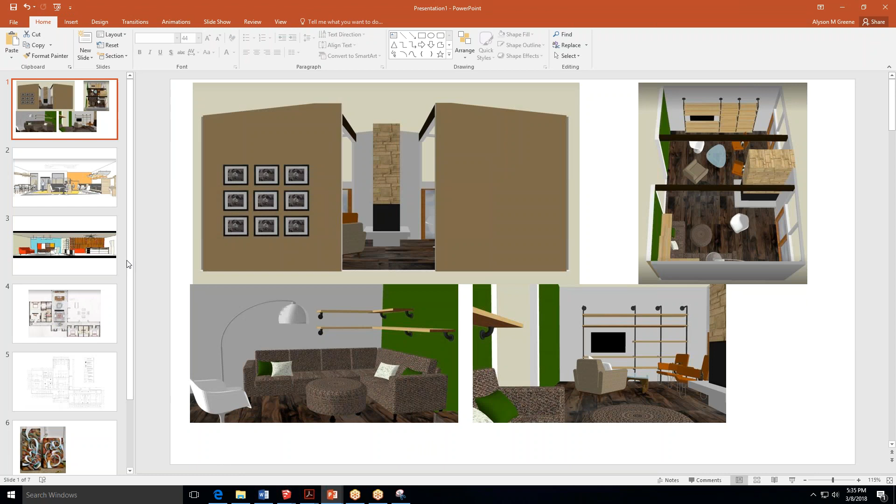I have a full SketchUp model of this crazy one, which I'll show you another time, so I'm not spending too much time doing this tonight, of a really strange project I have where there was a bathtub in the middle. Oh no, well, not a bathtub, a giant pool in the middle of the house, and AstroTurf. Very strange. We bought this huge house and we've completely changed it around.

I've also been you. I've been a student. So these are things that I've done with SketchUp 10 years ago. Still nice, in my opinion. I'd still go to this coffee shop. And this would have been in advance. There used to be not one, but 3 projects. So this was a smaller project in advance on top of my larger project that I did a restaurant for. This was a 1950s hair salon. Both of these files are SketchUp.

So SketchUp can be very clean, editorial, like something like this, or you can change the style and have it be kind of sketchy and conceptual, something like this. Depends on the feel of what you're trying to promote.

The 108 space planning class, that used to be different. So it wasn't the boathouse when I did it. It was create your own entire house, create your own entire 3D model, like physical cut out model that you had to do, and then figure out what the plan was. So this was my final rendered floor plan that I did by hand. And then this was an example of my drafting work, because back then you didn't learn enough CAD to do the CAD to go along with that class. So everything was drafted by hand.

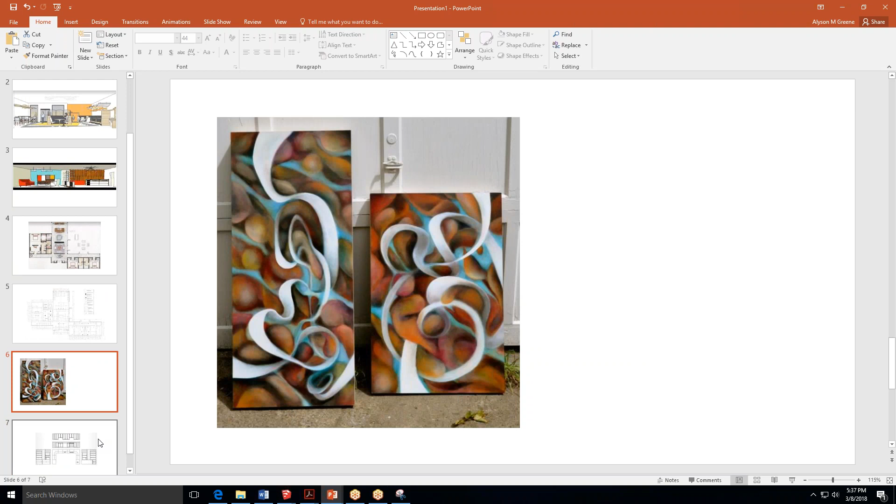Joyous day. And then I'm also an artist. This is art from my first year painting in college to give you an idea of what I used to do. I really enjoy abstract 3-dimensional art. But now I am in the process of doing a lot of commissions for friends and family.

So I have an artist friend and he wanted me to do a Frida. I don't know if you know Frida Kahlo or not. She's a very famous woman and kind of androgynous. You know, is it a woman? Is it a male? So I'm working on this painting. Here's my painting. Here's the original. It has a long way to go. This is like layer 3, a couple of days work. So a little bit longer, but I love to paint.

So I do all these things, the art side of it, the SketchUp side of it, and AutoCAD almost every minute of every day. And I love it. So if you have questions on it and you're not coming to my lab hours, you're really not bothering me. I mostly answer anytime, day or night. If I'm not, it must be something really important. Yesterday I had 6 people hit me up for lab hours that didn't exist, and it ended up being a full day of lab hours, which made sense because Monday didn't work out for me. So if you need me, let me know. You're not bothering me. I like my job. I like helping people, especially with these programs.

So we'll close out of here and let's look at what we're going to do today. Some of you had space planning today. So Professor King was talking about the office that's going to be placed on the site plan. I developed this office. This is exactly why you need SketchUp. SketchUp is so great. It takes something flat that we normally wouldn't be able to use.

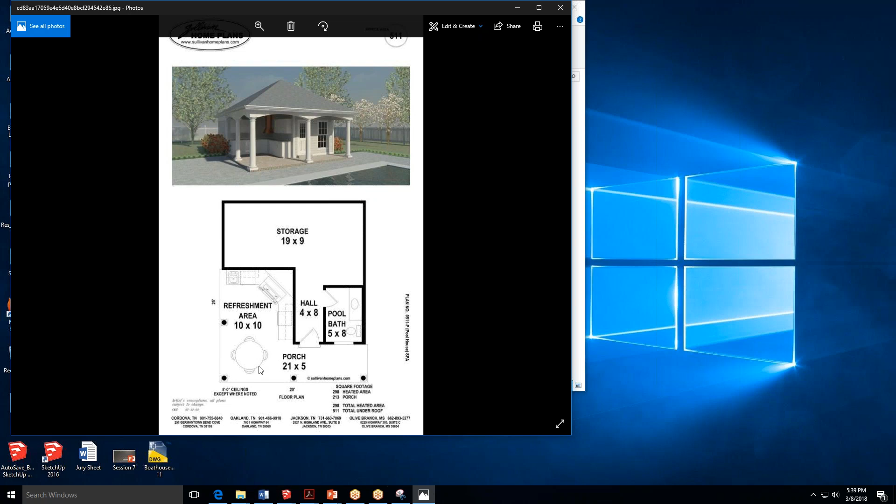I put almost the same dimensions into my AutoCAD file and modified it, and that eventually gave me the SketchUp file you're seeing in front of you today. I just did it from that picture, and I intuited a lot of the trim, what looks nice, what kind of detailing and moldings I'd need. Some of them I drew myself, and some, like the columns, are items I brought in from the 3D Warehouse, which we'll learn about tonight.

It's controlled, and this is real brief, there'll be more detail in a minute. On the right-hand side, it has layers, and we'll see overlapping tools. They look really similar, like this 3-point arc and this move tool. This is a paint bucket, which you're probably familiar with from a different program, and a measuring tape. A magnifying glass. You get used to these things and realize it's not so bad.

Redundancies, repetition. Hopefully this will go my way.

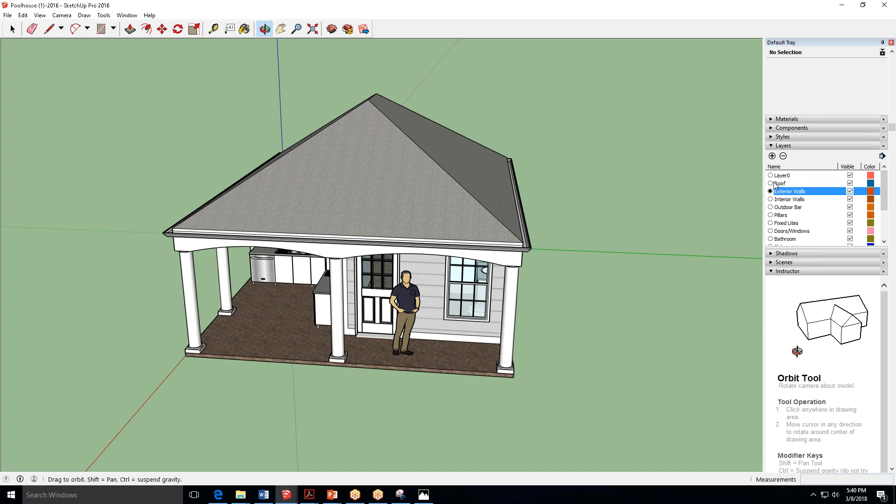Now it's very different software, but there are things that cross between the two. Layers are one of them. So if I put things on really nice layers, like my roof—who knows, this is an old file—I can turn my roof on, turn my roof off. I can rotate up, we're playing dollhouse right now, come over the top, look down into it, and it's really nice. So it's just like CAD, but three-dimensional and polygonal.

Polygonal, P-O-L-Y, like polygonal, that's probably a better way to say it. I'm always shortening it. So we'll explain what that means. A little bit different because they're segmented, disjointed lines, and never actual curves. Well, it looks like a curve, but it's lying to you. Your eyes are misleading you.

So this is the office plan.

Unlike CAD, where I did a slow start, getting in the water, testing your toe, this is a jump-in-and-swim kind of week. It'll be due after break, the 22nd. I'm going to get as much into this video as I can and get us as far forward as I can to help out with the 108 students. So you'll feel it this week, just a little bit, but we've got a break and then another full week. I hope the video is pretty clear.

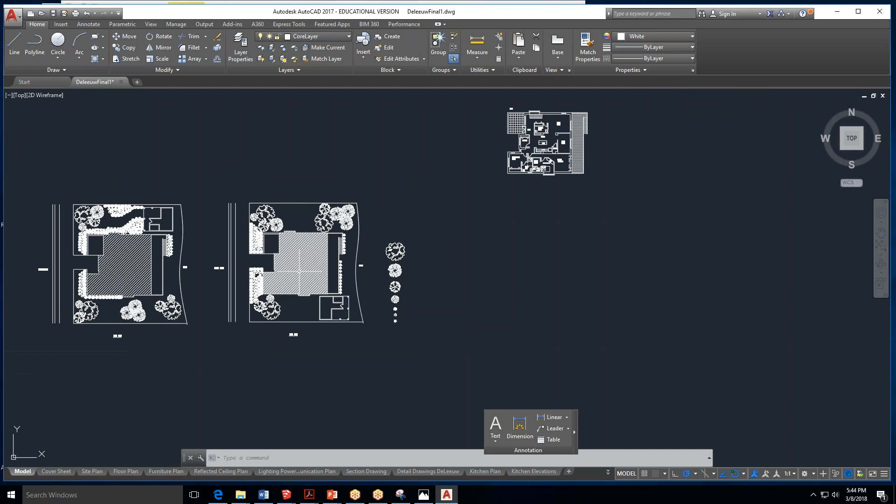But you can put it anywhere you can fit on the plan. Now, she had specific plantings she wanted to go on her plan, so she tried it a couple ways. Here she was like, well, what if I build this nice pathing from the road? It's private with plants, and then I put my guy back here. What if I put it in the other corner? I probably like this one better. What if it's closer to the road?

You could put it up here if it'll fit in here. And the way you'll know if it could fit is you come to the very end, and that's the end of your property, right? So you could give yourself some guidelines like she did to say, this is what I can work in. There might be an easement that she allows extra besides that, sometimes I know she'll say that in her instructions. But if we're staying in the perfect boundary, somewhere in here, we got to plop this guy down.

Now for my students, don't care, wherever you want it, that's fine. You just draw it. That'd be wonderful. For students in her class, wherever makes sense to go along with your actual work.

You might want to put this guy on his own layer, right? So we could go up to layer properties. I can only imagine what Liz's layers will look like. And then we get a new layer, and we can come in here and say, what do we want to call him? Outdoor office, you know, whatever makes sense to you. It's just a layer. It's a way to manage things.

So I have outdoor office, and while I'm drawing it, I want to make sure that's my active layer, so I can drop down the layer menu and go into my outdoor office. They're alphabetical, here's my O. And if I was drawing, then I'd start drawing until I complete this. Now I didn't draw it, so I could also select everything and at the end go in and plop it onto that layer, hit escape, and then check it. Yep, everything's on outdoor office now.

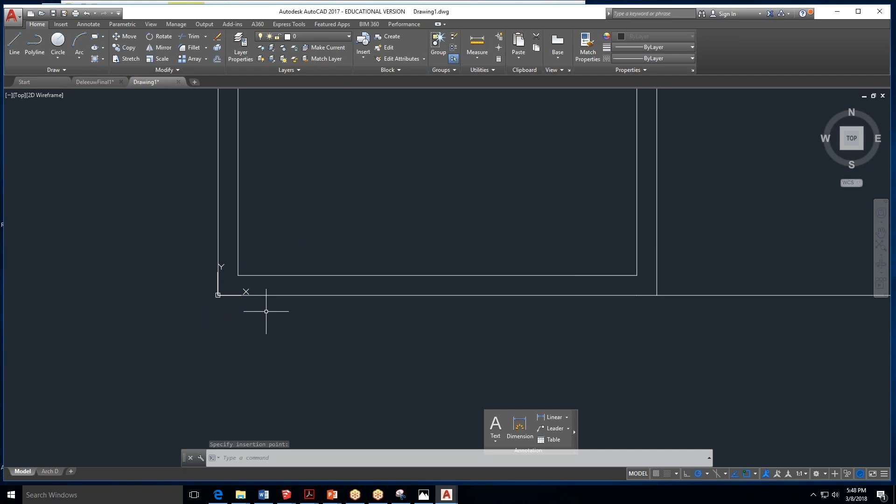We got a nice clean point of access right here. We can do Control V to paste it in, or we could have clipboarded it in with paste up here. And I'm not going to make you do the comma 0 0 whatever and put it there. Just kind of locate it here, because SketchUp does well with finding that same 0 point. So the closer we get it to it, the easier it'll be to locate it on SketchUp's screen. So ish, not perfection. If you want to, you can review that, that's like in our second week of CAD video, how to get stuff at the origin.

So I have him placed. Now I'm going to save him, and he's in my architectural imperial. That's really important because that's feet and inches. I'm going to save him as something meaningful to me, so I could do outdoor office, because that's what I did in the other one.

If you have a special author you're designing this for, you could use that person's name. I don't really care, just that it makes sense when you go to import it. So wherever you want, for me it's under week 8 on my desktop, and I can save it. Now I have this file, isolated from the bigger file, and it's really, really clean.

Let's look at SketchUp. I have a bunch of stuff I want to keep open, and for my sake I'm just going to keep it open so we can review some of it as we go on. But this is a trick.

I already have SketchUp open in 3 places. If you tried to open SketchUp once and it popped open and then you started working, and then you went to open within SketchUp, it'll ask if you want to save the current file, and then it'll close out of it. So in order to prevent that and have multiple SketchUps open, if you have a mouse with a center click, you click on this symbol down here and it will open a whole nother SketchUp, as opposed to opening within itself and closing within itself.

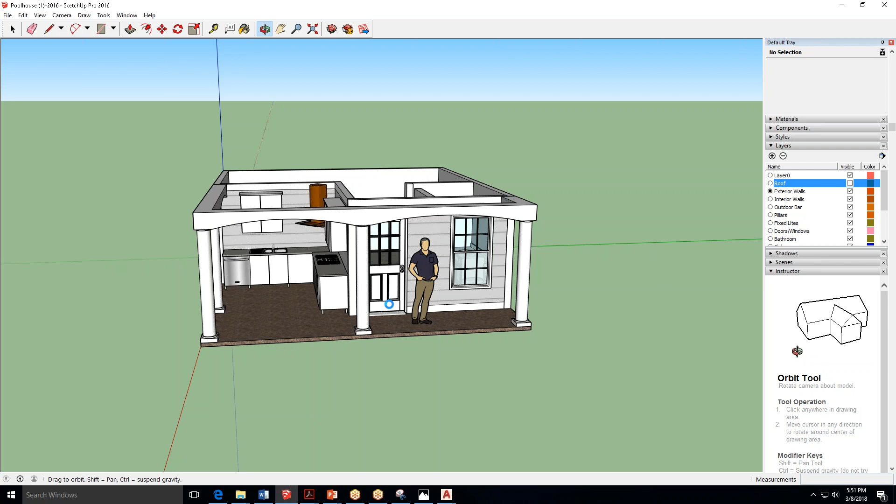All right, so that's if I want multiple SketchUps open. I could have one open, and then I could click on it with my center scroll. If I just have SketchUp somewhere here, so here's my 2016 on my desktop, and I double click it, and then I say start using SketchUp, it'll throw me into whatever my last template was, or choose template.

It might force you to come in here to this template and you're like, oh my gosh, look at all these things. So there's simple template feet and inches, simple template meters, architectural design feet and inches. What is the difference between architectural design feet and inches and simple template feet and inches? Well, this is really silly and you're not going to believe me, but the difference is that architects don't like the blue and the green. They like the cleanliness of the gray and the whitish gray background. So they created this template which doesn't mock the reality of the outside, just to be fancy. And that's the one I like to use as well, because I'm not a huge fan of the sun and the sky, but we can do either one of those, simple template feet and inches or architectural design.

I'm going to use architectural design and start using my SketchUp. So that throws me into here, which is going to bring me to kind of our notes and where we're going to be with our homework tonight.

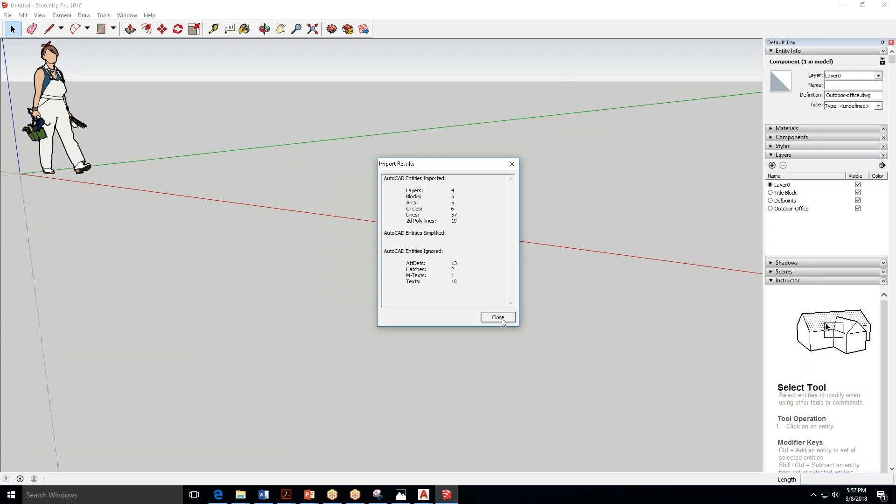Within there, I had saved the file as Outdoor Office. I'm going to left click on it to make it active, and then I'm going to click Import in the bottom right-hand corner. It's thinking through all these things. Look at how many things it had to think about. Layers, blocks, arcs, circles, lines, polylines. It thought about if you hatched things, if you had text. So you can see why a bigger file would drive it absolutely insane. You can click close. It's not going to hurt anything. It's going to continue on its way.

Notice it forces one of the corners to the origin here. I know it's the origin axis because there's my axis lines, right? I have the vertices of all of the axis points meeting with each other, and we'll look at what those things are in a minute. There's an orbit tool. It looks very similar to AutoCAD's, up here in our toolbar. And if I rotate around, so I'm left clicking and moving my mouse across the table as I'm left clicking, holding down, not picking up. So not click once, but click and hold and pull my mouse around in order to orbit.

I can also zoom in and out with my center scroll, just like in AutoCAD. There's views that are like AutoCAD, so the top view in AutoCAD is what we're defaulted to. When I'm in AutoCAD, this is my top view. I am bird's eye looking down. When I'm in SketchUp, if I go to View, let's go to Camera, Standard Views, Top. It gives me the same identical view as what I'm seeing in AutoCAD.

Now, I can't promise you. If we look at this, it's really nice, so I hope that it comes in like this. I've seen it happen the other way though, that it comes in, my origin was here, and it's not oriented how it's supposed to be. I'm not going to promise it. It might have to be rotated, which we can cover in a little while, but it looks very similar. We see these snapping points. Now we have a plan we can start to build some three-dimensionality off of.

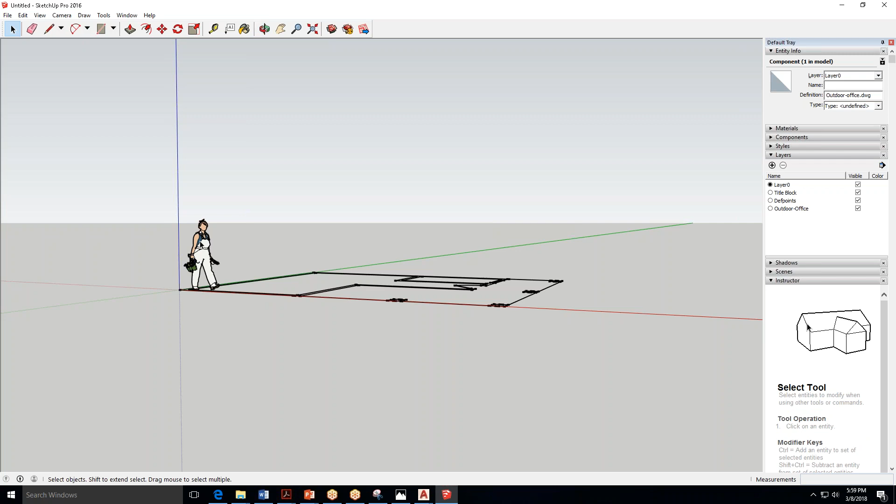If I rotate back up, it's no longer in top view using my orbit tool. Now I'm going to use Rosie the Riveter. She's going to get out of the way over here. So I could select her by clicking on her. This is our select tool. Select entities, modify tools, or other commands. Similar to CAD, we want to see that little mouse pointer. I clicked on her. She's blue and active, like things in CAD when they are active.

And now I'm going to just move her out of the way. So if I click on Move, and then click on her, I can move her out of the way. Now I could put her in the sky. I could put her on the ground. Notice there's a little red line. It's very similar to that ortho tracking that we have going on in CAD. So this is just moving her out perfectly along that red axis to the right side. So there are snapping lines that are created by these dashed lines that will appear when we want to move something more strategically. Now Rosie's way off over there, okay?

All right, I'm gonna look at my chat. Okay, we're still good.

So we have our import. Let's go back to our homework. We've imported it, and my steps say that I am going to draw all corners and diagonals before anything else. I'm actually approaching this differently this year, so if Heather's here, it's going to be really different, Heather. I mean, the tools work the same way, but I'm not going to have them draw abutted corners. I'm going to do mitered corners so that the wall's exterior works a little bit better. We're going to do those diagonal lines all at once to start creating faces.

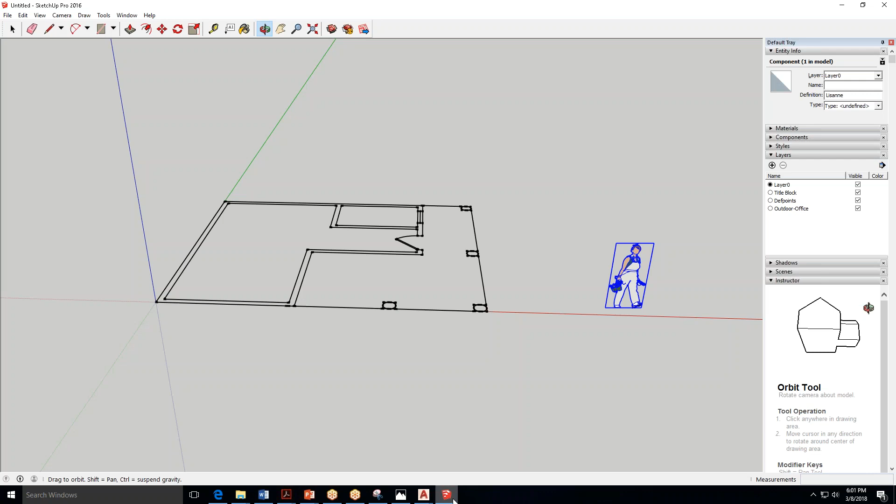Keep with me. So I'm going to go back to camera, standard views, top. And I need to add faces because right now I just have lines. Notice how it's like black lines on a gray sheet of paper. I'm going to show you if I grab the rectangle tool, hover, I have shapes under the drop down menu. There's rectangles, rotated rectangles, circle, polygon. Most of the time we use rectangles and circles. So this is part of your homework earlier, like the easier shapes. Just grab the rectangle tool and draw a rectangle.

Notice the difference in the gray. So at the center here, when I left click and I went back and grabbed my select tool to click on here, I'm selecting the face of this object. When SketchUp has 3 or more lines, it creates a face.

So if I was just drawing lines, which you do with your pencil tool for lines, hover over it in the upper left-hand corner, I left clicked on it, and then I left click to start drawing lines, so line 1, and then I want to click on an endpoint, line 2, and I want to click in to finish. When I finished with 3 lines, it can't be 2. You need at least 3 lines to create a face. There's a lot of mathematical geometry going on here.

So I create my face. Then it puts the face in the middle. It's almost like adding glass over a frame. We made our frame. It's perfectly connected. And now I can put my sheet of glass. It just appears in the middle, creating a face. My faces are separate from my lines in reality. Here's a line, a line, a line, and here's a face. Here's a line, and here's a face.

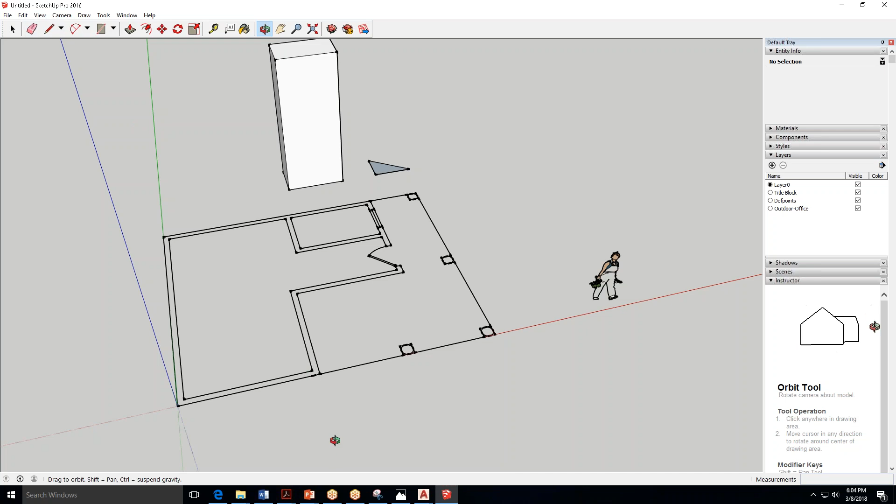So I want to create all the walls of my final office building. So I'm going to go back up to camera, standard views, top. There's a lot of little terms I've got to get in here, terminology on top of the homework. So how can I create the faces best and put them on good layers and group them so I can turn them on and off?

Most importantly, because we're moving towards using this to create really good elevations, both interior and exterior, is the ability that in 3 dimensions, if this was all one piece in here, and it was all in one layer, just like in layers in AutoCAD, then if I wanted the bathroom elevation in here and I went to turn it off, the back wall would turn off with the front wall. We don't want that. We want to have the ability to turn off just this piece or just this wall and looking at it from different sides. So it's a lot of layer management. The more layer management, the better your outcome will be.

I'm going to grab my drawing tool, my line tool in the upper left-hand corner, and I'm going to miter some edges in here. So I'm going to add a line here, and then I'm going to hit escape. I'm going to add a line here. I'm going to add a line down here. It's trying to keep, I'm scrolling in. It's just trying to keep up with me. And a line here.

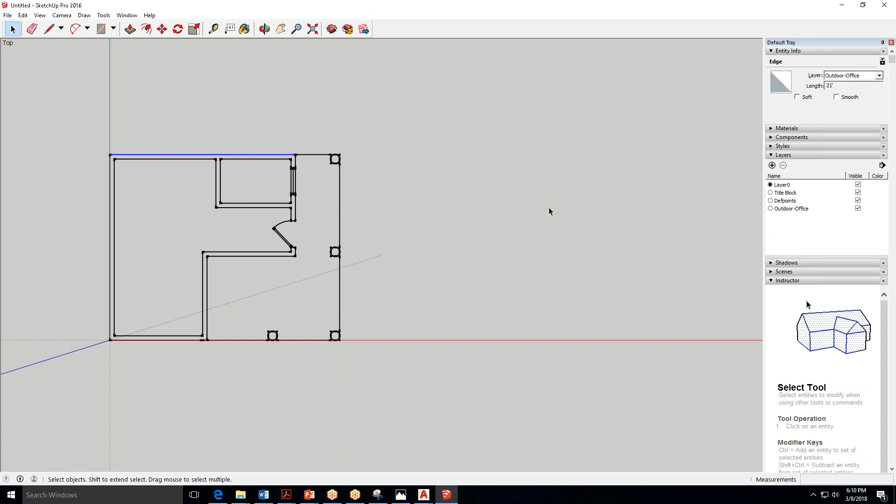Okay, so if you had clicked on it and the whole thing was blue like this, the step that you need to do is simply right click and click explode, like that. And once you explode it, then it's lines, and we're all going to be in the same place. So if it comes in as lines, that's great, you're ready to go. If it comes in as a big blue block when you click on it, you need to right click on it, and the word explode will be there. Click that, and it'll turn it into lines, just like in AutoCAD. So it's kind of good we're covering these little weird things that can happen.

So now I'm ready to draw those lines, and this should be more efficient. I add my little miter corner. Now, because it created the whole face, you're not done. We still need to have multiples eventually. So I want to come in here and draw my little corner. I want to come in here and separate off the interior walls, and these interior walls. I want to do the rest of my corners.

And I'm simply clicking twice. So I have my line tool, I'll click there, click to the second endpoint. Just like in AutoCAD, we have snaps. So you saw it's like, okay, endpoint to endpoint. You want it to say endpoint to know that it is in fact connecting and you're not drawing short of the line, which won't create the right amount of faces for us. So once I have all of those corners mitered off and the interior walls kind of sequestered, let's look and see what our homework says we want to do.

Delete extraneous window and door lines, close off, create guides for window and door. So we're going to end up bringing in models of doors and windows, so our lines no longer matter to us. What matters is the opening. So these lines don't matter. Notice I can just left click, hold down and pull to the right and then release, and that will select this door here. If I do it the other way, it's only selecting certain things that are inside the box.

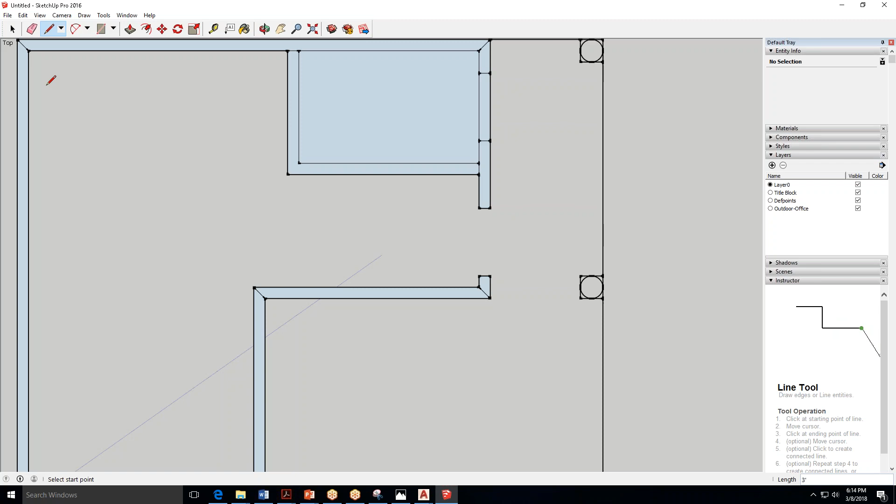I need another line yet, and it might do the same thing. And you're just going to get used to SketchUp being like, I want to do this for you. And you're like, no, you're not Google. Don't complete things for me without me asking you to. So keep going. Oh, I did it again.

Come on, SketchUp. So then you click in here, click delete, and click in this big piece and click delete with your keyboard. So I'm hitting delete on my keyboard. And then I'm going to click my line tool again and finish up the other side of this opening that I'm closing. Now we have to do our selection tool. Click once for the face, delete.

Don't double click. Now, some of you are the crazy clickers. You cannot be that way in this class anymore, because in SketchUp, a double click means something different than a triple click, means something different than a single click. They all do really weird things. So when it's single click, it really matters this time.

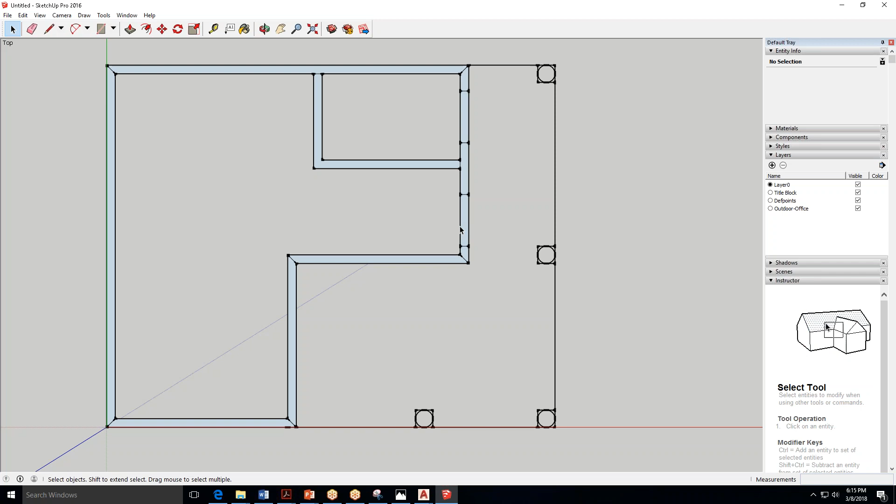I'm going to single click in here and click delete as well until I have just the core walls that are showing as faces. So my homework said, do all of that work, extraneous lines gone, and then draw some guidelines based off of these openings to rough in my doors. So we're starting to get three-dimensional at this point. So I need to know some heights, and you're just going to trust me.

I'm rotating up with my orbit tool. I'm holding the left click and pulling up like this. If I hold it and pull it down, it goes down. Some of these things you just have to experience for yourself a little bit, but I can clearly see these snap points for my windows and doors.

Let's look at our homework. So my window is 1'6" above finished floor for the sill height, and my door is 6'10" tall to the topmost part of the door. I think I'm missing one dimension there, but we'll be okay for now. So this is my door opening. I could know that from my PDF.

Now it's oriented the other way, so let's view and rotate the view clockwise until it's matching up like this. So here's my door opening, and that's what needs to be 6'10". So I'm going to grab my line tool, left click on the first point for the corner of this door on the exterior end point, and now I'm going up.

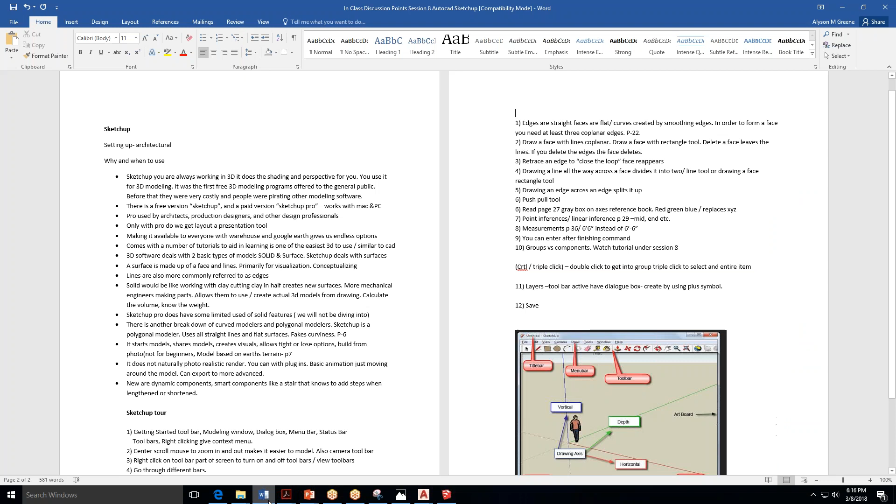Okay, so before I finish going up, I want to look at my notes page, which I might refer back to, and I have no problem with posting this later for you. But right here's my notes page, and it's showing that blue line, and I bet this is kind of hard to see for some people on the screen, the size of a small book. So if I zoom in a little bit and we look at this picture, the blue line is our vertical.

Okay, so the line's going straight up and down, and the red line is my horizontal, and the green line is my depth. This is really important to remember. So blue vertical, green depth, red horizontal. But when it's blue, it means it's perfectly straight. So that's good. It helps me understand some things.

And then here we can see toolbar. That's the most important term I've used so far. Where our tools are at is our toolbar. Title bar, like in CAD, it tells me what my file name is. Status bar, it's basically like our command line. It's telling you like move this to the left or what's the next thing you want to do. And this is telling me measurements in the lower right hand corner.

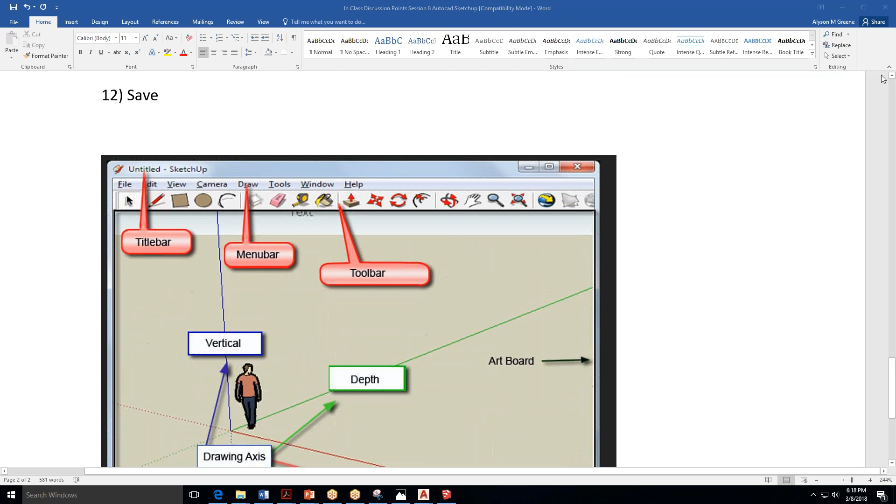I feel like I heard someone kind of speak, but I'm going to keep going.

So vertical line, great. That was a good signifier that I was doing the right thing. Vertical up 6'10". So when we type measurements in SketchUp, they show up over here in the VCB box where the length is. Unlike CAD, we don't have to put a dash between anything, and actually newer CAD doesn't require it either. So if I'm doing 6'8", I can type 6'8".

Look in the lower right-hand corner. See how I typed it? Yes. I think you said 6'10" originally. Oh, 10. Thanks, Heather. It didn't finish it yet, so I'll pull it up. 6'10". Heather's right. I changed it this year because the molding makes it 6'10", and it was a weird thing last year. All right, so see it in the lower right-hand corner, 6'10".

Now I can hit enter to finish the line. I think something went weird because I was kind of tracking off, so let's try it. Measuring in SketchUp is even more important than CAD because it does get sticky sometimes. I want to see this blue line, and I want it to be 6'10".

Enter. All right, let's measure it. Maybe it's right, but it looks like it's falling short. Oh, it's good, all right, it just looks so teeny tiny.

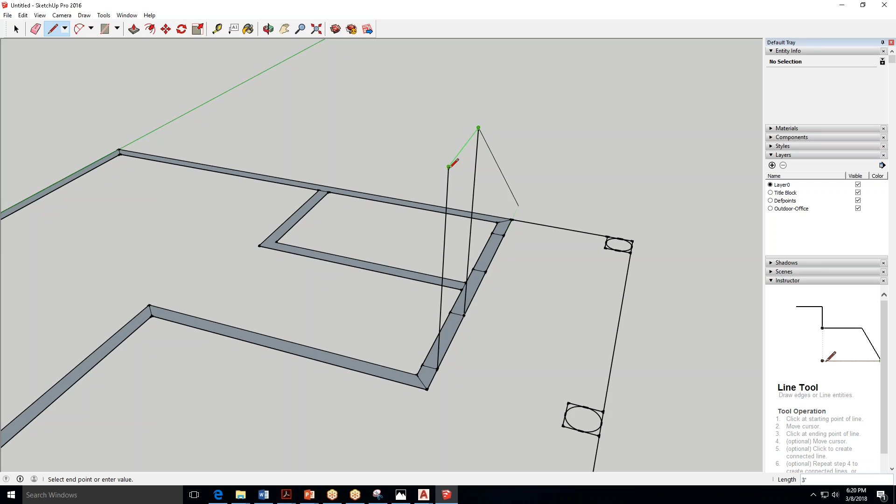Then I want to do the same thing from the other exterior endpoint. Snap to the blue, it'll turn blue. See how it's blue? I'm going to type 6 foot mark, 10, right next to it, and then the inches mark. Enter to finish my line. Then I think I can even connect them and I'll be fine. We'll see what happens. If not, I'll just delete that line out.

And now I have where my door is going to be. My window, I at least know it's 1'6" to the sill height above finished floor, so I'll confirm that here. My window is 1'6" above finished floor. That's this point and this point need to be up 1'6".

It needs to be snapped to blue. So 1 foot 6 inches - I'm typing on my keyboard, you see it in the lower right. Enter. And then I'm going to hit escape and grab that tool again.

I'm going to do the same thing on the other side. 1 foot, 6 inches. Enter. All right, so that gives me some guidelines.

Now that I have those guidelines, I'm going to go through - and it's not going to make sense why until I do it - but I want to delete these out, because what's happening is SketchUp recognizes these as individual pieces. So if I go to push-pull them now and push this up 8 foot, it'll be a bunch of different segmented pieces instead of a whole wall I cut openings out of.

So what I'm going to do is delete out these lines interior to the wall. I clicked it and then hit delete on my keyboard, clicked it with my selection tool, hit delete, all the straight ones, not the corners in this case. And I have guides as to where my doors and windows are going to go.

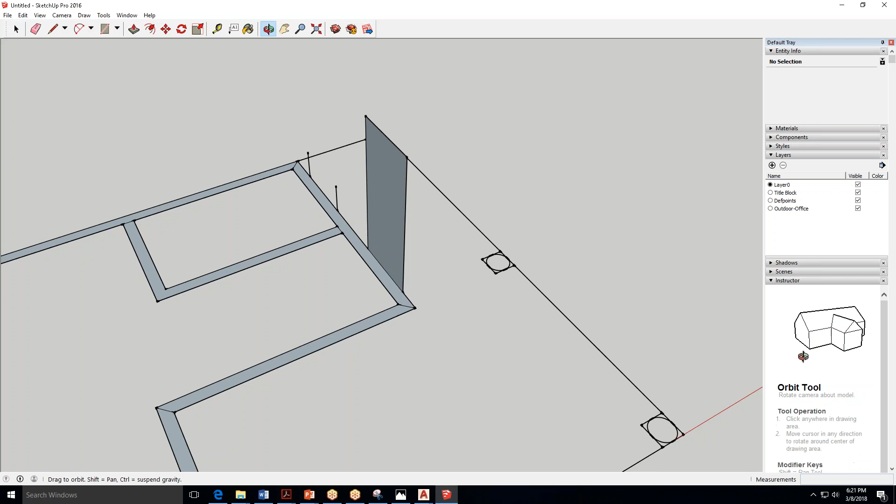So I can now start to organize things, because those were my only openings I needed some type of guidelines for. And when I push this up, it's going to be a full wall - you can see the full face now is highlighted instead of those segmented pieces.

So if I go back out to here, I've deleted the extra lines, created the guides, and now I need to create some layers to help manage my whole drawing. So I need north, south, east, west walls. That's easy enough - you want to make sure that you have your default tray open.

See this guy over here? He's called your default tray. If he's ever gone, you can come up here and open him from Window, Default Tray, and turn him back on.

But he should be here when you open it up. Under the default tray, we have materials, which if you click on any of these little drop down arrows, they'll make them bigger and there's more stuff you can do. And styles, but we want layers.

Layers might have been closed - this might be how it is when you come in. You just click layers. I would recommend not having too many things open in the first couple weeks until we know what they are, so you're not visually overly stimulated. So we have layers, and we need to create north, south, east, west wall.

I hit the plus button to add a layer. Notice when I hover over it before I left click, it says add a layer. I left click and I can do north wall. Then I can click plus again, south wall, plus again, east wall, west wall. All right, there's all my walls.

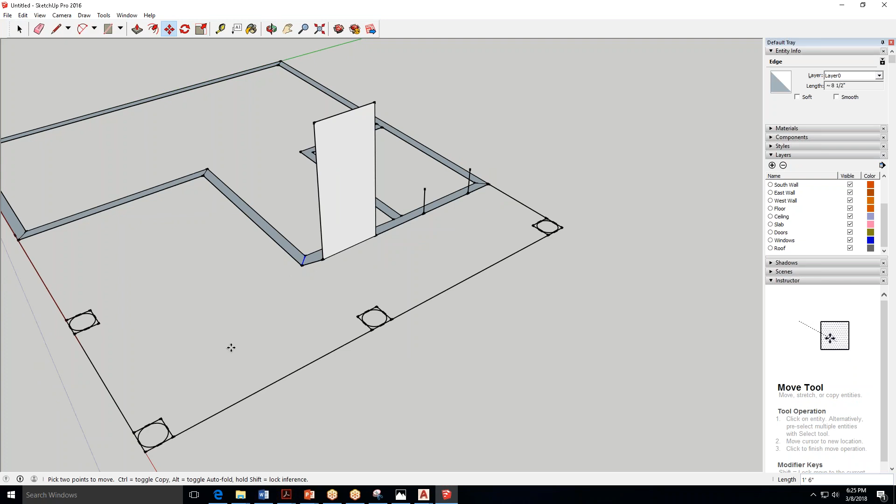So in order to create a group, right now we just have a bunch of stuff and it's all really sticky and not good. So you don't believe me yet. But if I tried to move this line, for instance, and it's not in a group, look what happens. Ugly things happen to it. Oh my gosh, SketchUp, you are one crazy beast, and it really is mind-boggling, to be honest with you.

So you don't want to move things by their lines. You want to move things by nice contained groups that are very strategic. What I need to do is have this whole wall be in a group, this one, this one, this one, this one, because I want to turn them on and off separately, and I don't want them to move like creepy abstract shapes. So if I'm going to do that, I need to select things.

Now we can select by clicking things. If I hold Control, see the little plus next to my cursor? This cursor in here, the little plus. I could do them all individually like that and click, and I'm holding Control. I'm not releasing Control, so I'm holding Control and continuing to click all the little pieces associated with that first wall. The corner pieces do not matter in this situation, okay? Just all the lines and the faces, not the corners. They do not matter. So I could select everything individually using Control.

And the great thing about SketchUp is you can move just like AutoCAD, but I don't think people believe me sometimes. So like I have all this selected, and then if I select on my orbit tool, it's still all selected. I can kind of look around and see if I got anything as long as I don't click off of those things, click on the screen before grabbing my orbit tool. So I've got everything from my first group.

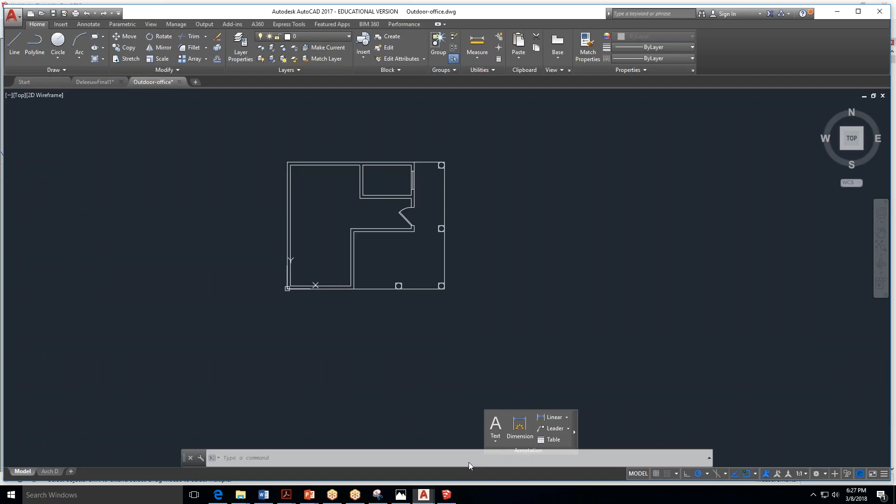Now I don't care how you're organizing your wall. For me, I'm going to call this north wall today just as a jumping off point so you understand, like this is north, this would be a north, this would be an east, this would be a west, according to how I'm doing it. But if you're in your AutoCAD, you really want it to be based off of our model, right? So if this was it and we have this being north, so this might be north if this is how you end up placing it.

So it's up to you. But what I care about is the walls make sense, your layers make sense. So I wouldn't say this is east and this is west. There wouldn't be a vertical east and west. It would be opposite ends, kind of a thing. So this is my north wall.

And I'm going to keep going around and making these individual groups. But this one right now says in the right-hand corner, it's on layer 0. Well, that's not useful. So I'm going to, just like in CAD, drop down next to layer with the wall selected and find north wall. And then I'm going to click off. Now, if I click on it again, just to check, it's on north wall. Great. All right, I'm going to click off so nothing's active, just on the gray space.

And then I'm going to go to this next wall, which I said is going to be, so if this is north, south, this is my east wall for me. Doesn't make a lot of sense with how it's oriented, but it just is for me. So I can also select things like this, right to left, and it grabbed everything I need. Big long line, face. I don't care about the corners because they're just joints. So I'm going to right click on that and click make group. And once it's a group, it's active, I can come up here and I'm going to put that on east.

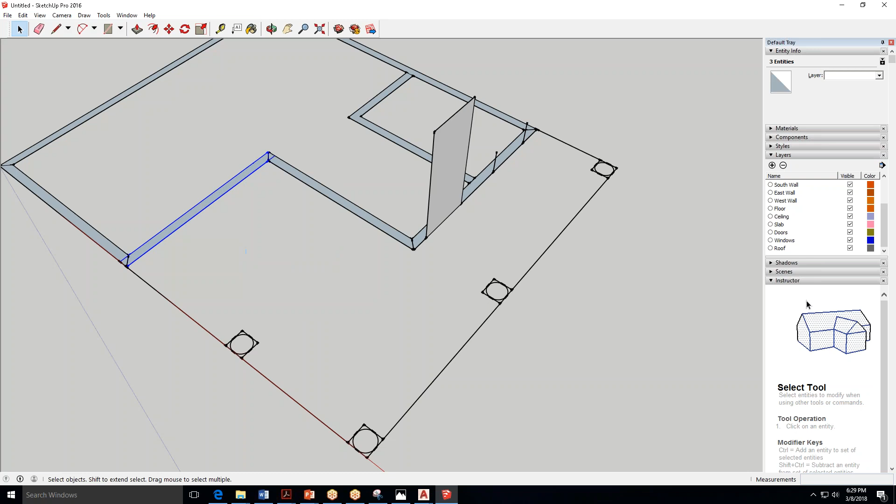I'm going to come in here, right click and select those three things, line, face, and make that a group by right clicking. I'll put that on layer north because it's still technically part of this north face on this side of the building. I'll do the same thing continuing on. I'll escape out so that's not active. So this is on north, this is on east, this is on north.

You can check yourself, it's in the right-hand corner. I'll hit escape so nothing is active, or click off into the gray space, not on a line, and continue to select around and repeat that process. I might not keep talking at you for a while, but let's right-click these things first.

Right-click, make a group, layer east wall. Notice they're alphabetical as well. Then once it's a group, south wall. Right click, make a group, west wall. Now these guys, they don't have anything, so maybe there's an extra wall that we need to make.

Maybe we just make a layer not mentioned in your homework. I'll add interior walls, since they're kind of insignificant for us as we're not going to complete the interior this semester. That way I can collect what's remaining, make it a group, and put it on interior walls.

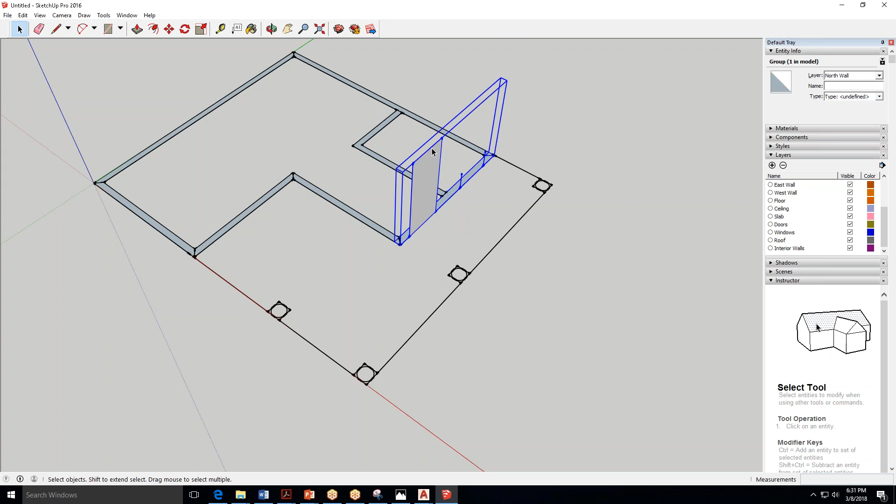Now I clicked out here in this gray space and I'm outside now. If I click on my items so it's selected and then double click, 1, 2, I'm now in here and I can actively change it. I'm going to zoom in a little bit and push pull my faces up to 8 foot.

I select my face, and I think I'll have to click it anyway. So if I click push pull and then click on the face that I want to push pull and start pulling up, I'm going to see the distance changing in the lower right hand corner, and I want to type 8 foot, enter.

Ah, I did undo. That brings it up, and I'm glad these things are happening so you understand why, okay? It said, sorry, your distance is not going to go past 6'10". This horizontal line I created earlier is inhibiting it from going any higher because it's snapping to it and won't let me go past it.

So I'll just have to keep my side guides, which are plenty fine, and we'll try it again. If I come into push pull, left click on the face, pull up, I don't want to snap to anything, okay? So we could even zoom out, and you can pull up higher than you're going and type 8 foot, enter.

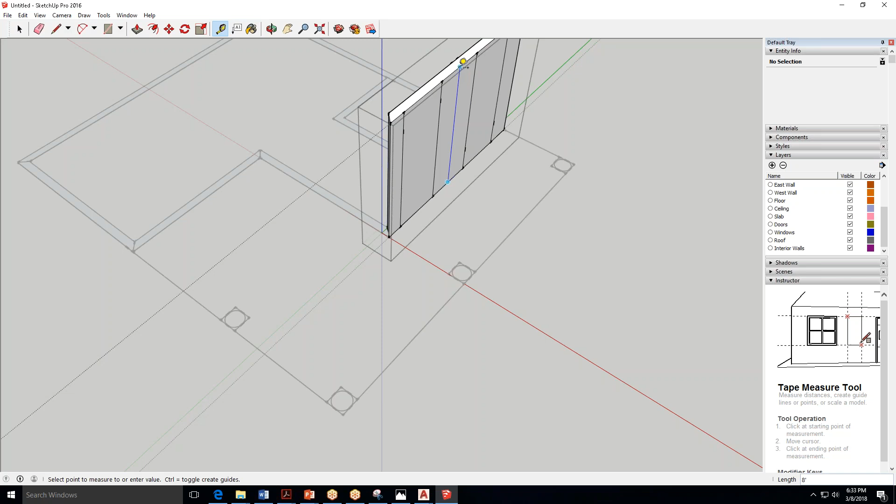I'm going to measure to make sure, 8 foot. Okay, so here's my measure tool, I left click on it to use it. I want some type of point, midpoint, endpoint on the bottom line, and some type of point with the blue axis snapped in place on the top. You can see, without clicking even, it tells me 8 foot. So that's what I wanted.

I can left click on my selection tool and double click out, or probably just even single click, but then I'm outside of my group because I clicked in negative space. So I've got some lines for these openings, and don't worry that they're overly extended, okay? SketchUp is really smart, and it's left me some secret guide points, which you can just barely see, like little thicknesses here, where it knows the real heights of those, and then there are other lines we can delete as we go on.

So first I'm going to push pull the other walls up. I double click on this to get inside the group, I single click on the face. I know it's actively selected because it's dotty, if it's not, it'd be gray and solid. So double click in the group, single click on the face, and start my push pull tool by clicking on the face and pulling up and typing 8 foot, enter. I do this all the way around.

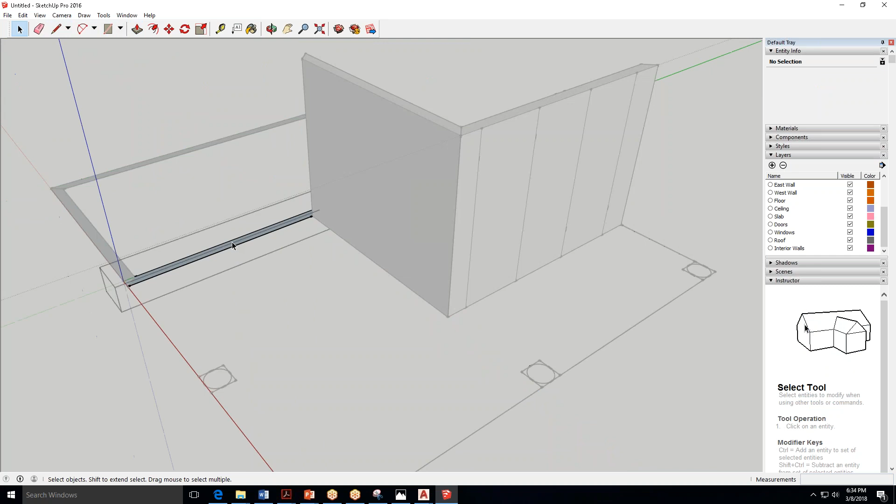So double click, push pull, click on the face, 8 foot, enter. I can always grab my orbit tool if I want to get a better view of something. I can pan in and out with my center scroll.

Is there a way to select multiple walls at the same time and do that? Not when they're in individual groups. Okay. If they weren't in individual groups, we could have done them all at once. If you hadn't drawn these little corner lines, because it would recognize the face as one giant thing for the whole building, like at the beginning how I had it, you could have done it all at once.

Or if I hadn't put them in groups and we just had the lines in between and I selected all the faces, it could pull them up separately, but once they're pulled up, it's going to stick them together if they're not in groups. And when you go to move anything, it'll get messy. Now, they don't have to be in groups.

Technically, you could have just had the lines, pulled them all up, and then gone through and done this really tedious selection process of picking the inside, because they'd all be separate things. Instead of being a group, it'd be like inside face, outside face, edge face, and you'd have to put that all in separate layers, which would work the same way, but it's messier, so just trust me.

So here's our pull up, grab it, click, 8 foot, enter, and then I can click off, click this back wall, double click to get in, single click on the face, click on my push pull tool, click on the middle of the face, 8 foot, enter.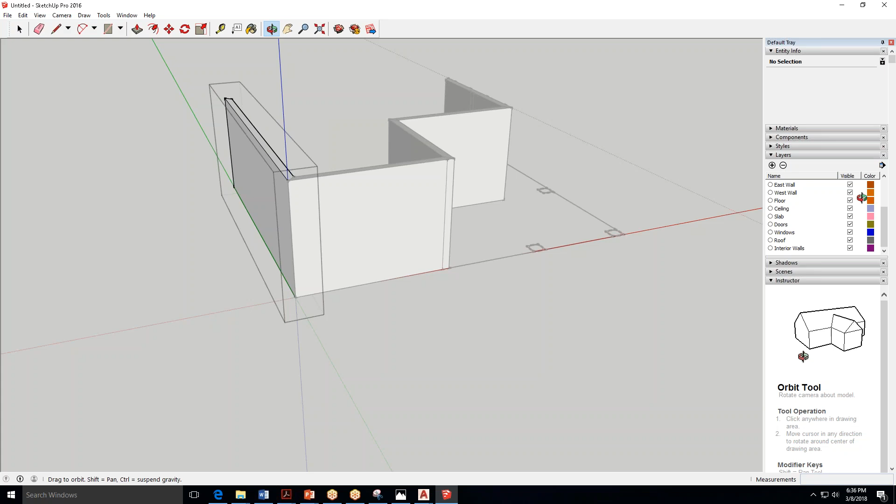It's really gratifying work. It's really rewarding, like a good offset in AutoCAD or anything else where it's like, woo, look at all the stuff I'm accomplishing with very little effort. So double click, click on this face, click our tool, push him up, 8 foot, enter.

Okay, so I'm going to go to camera, standard view top, just to show you. We've now got this really nice building, and all of the edges are met up and everything's on a nice grouped wall, so I can select them and turn them on and off individually.

If I orbit down this way and then let's say turn off my north wall, so over here's the visibility control for my layers, and I come up to my north wall and uncheck it, those walls go off, making it easy to get, say, a view of this wall in here or a view of this wall.

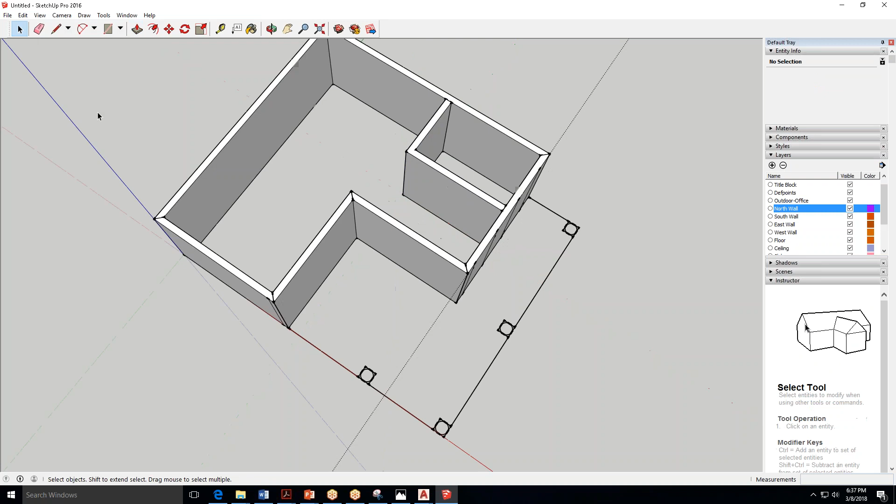So double click on here, I'm in the group, I select my face, my tool, and pull up, 8 foot, enter. All right, and then left click off. So there we have quite a deal of work done for us in not very much time, all things considered.

People who take Revit are like smirking, like this could be faster. But it's really meant for conceptual quick stuff, and it is quicker as far as the amount of learning that goes beyond the program. It's all very simple steps repeated in different ways.

All right, let's pull up that homework. Walls on layers, we push pulled. We'll do the columns in a minute. It's just telling you they all have 8 foot height. Hide ugly lines, delete extraneous layers. Okay. So let's see. I've got this guy right here that seems to be part of that group.

So what happens if I double click in this group? You saw that big dashed blue line? He was a guideline that must have happened when I used my measure tool. So I could right click on him with him being active and hide him. That's how we hide him.

We literally hide them. If I come out and I kind of rotate around over here and I grab my selection tool and I select this wall and double click because there's this weird corner line here. I click into the group by double clicking, and then I single click this little line, I right click, and I can hide him as well.

So now they're hidden. Now if you ever want to see hidden things, you're like, oh no, I really loved that line, you can go up to View and Hidden Geometry, and it'll show dashes of anything you've ever clicked on, and you have the ability to double click in there and right click and turn it back on. Okay, so nothing is lost. We did not delete it, we hid it. I don't want to see it though because I'm cleaning up shop.

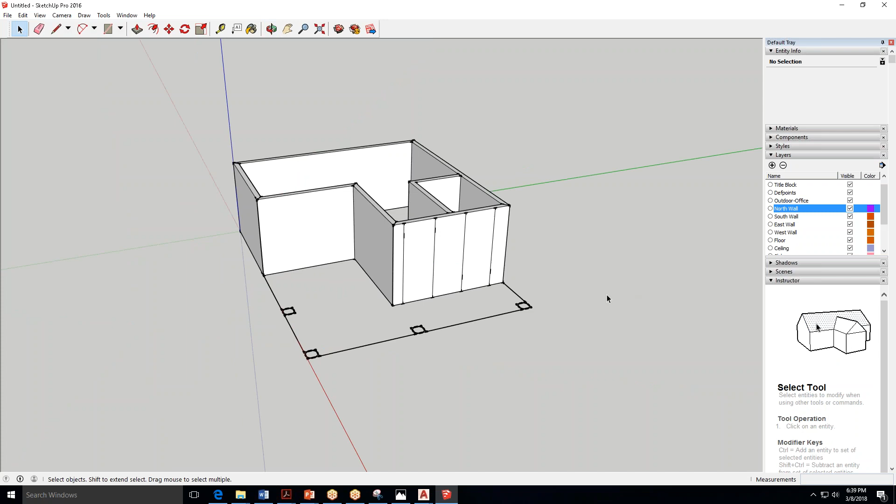All right, so I'm going to click my orbit tool, orbit around a little bit more. These lines I need so far. It wanted me to finish deleting those messy lines. Probably should sneak around back. It looked pretty good, but no more messy lines besides my guidelines.

The other thing it wanted me to do was delete extraneous layers. So, like I said, SketchUp's so smart. It brought in some things from CAD, our Defpoints layer, which is useless to us. So I want to delete this. If I come over here and I right click on it, well, actually, I don't even need to. It won't let you. So let's just click on it so it's actively blue and hit minus. Other things that came in that we don't need, title block, that's nothing to do with what we're doing. We're going to click minus to delete it.

It says delete layers that are not empty. Choose what to do with the contents. We're just going to delete the contents because I don't think it's anything I need. It didn't delete off my floor plan or anything. Layer 0 is fine. We can keep that. And then it's just all of my stuff left in here. I think outdoor office is that floor plan, so I might want to keep that for a while, so don't delete that. Basically, that Defpoints and title block were extraneous layers we can easily delete with this minus button.

All right, so let's go back to our homework. You're working through it. Cut window and door holes. Oh, the easiest but most maniacal part of this whole thing. I'm going to do it. It may or may not look easy. You never know. It might work. It might not work. Right, Heather? And then after we get it done, you're going to think it's really magical, and then you're going to get real frustrated at home. So let's give it a try, though.

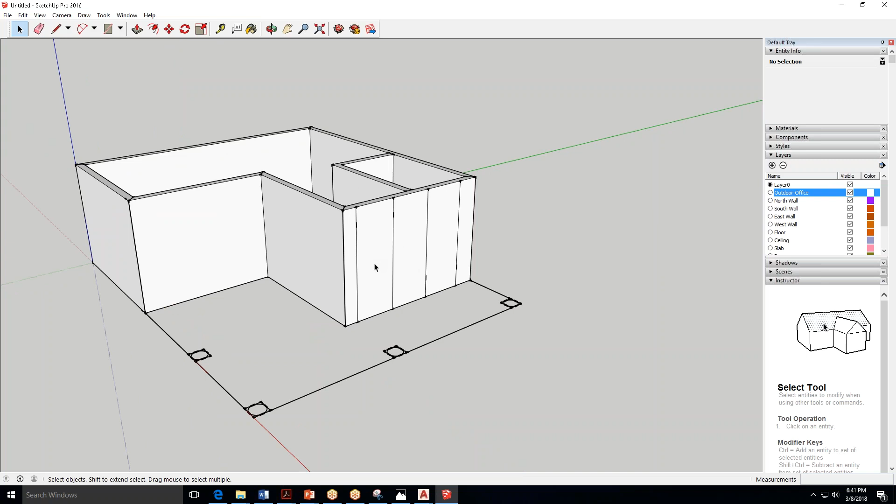We need some holes for, let's try our door. So that's where I said, we got these secret points that are still here. Let's click our selection tool, select it, that's one click, double click to open the group so only it is active. All this gray stuff means can't touch me, sorry. Grab my little pencil line tool and it wants to find this endpoint on these kind of thicker lines. Now if you zoom in closer, they're not going to get much thicker. It just knows. So if I was down here, it's searching until it finds that green point, which you know is about 6'8". So we can come in here and connect these two endpoints.

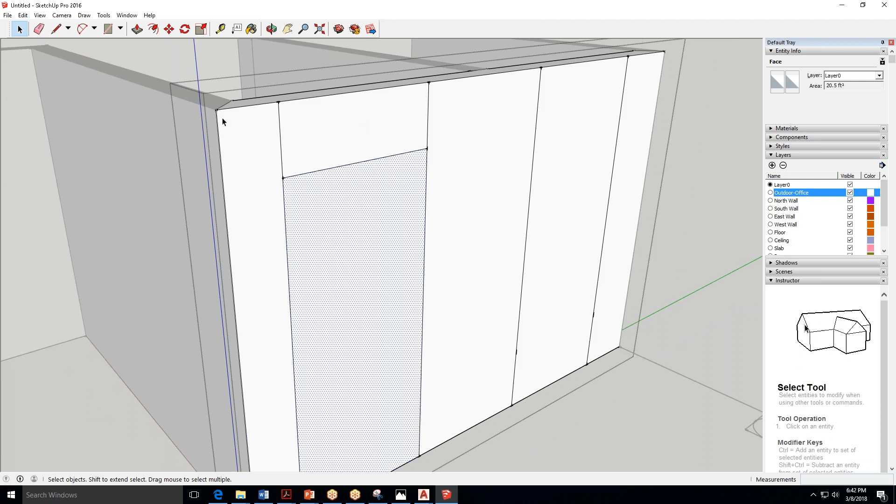I'm going to click on my selection tool and see what that did. Well, it finished off the door hole for me. Now it's a separate face, right? I don't want these lines because they're just part of the wall that was overextended. So I'm going to left click on them with my selection tool and then hit delete on my keyboard. Now let's see this eraser tool. Would it work if I click on this? Yes. So it does. I'm just less thrilled with it.

Okay. So now I'm going to kind of orbit up here a little bit. Now that I've created this hole, and I can tell because there's a face. Well, I've created a face, I should say. A face for my door. Notice it's only on one side of the wall. Boo. We want it to go through the wall. We want an opening, not some weird wall covering.

So we need to grab the push-pull tool by clicking on it, click on the face to push and pull, and click to the back side edge. So see how it says on edge? Click it. And when you click it, you will get the best feeling in the world as your door is made, or at least the opening is made, and everything disappears and there's this really clean hole that's created for us.

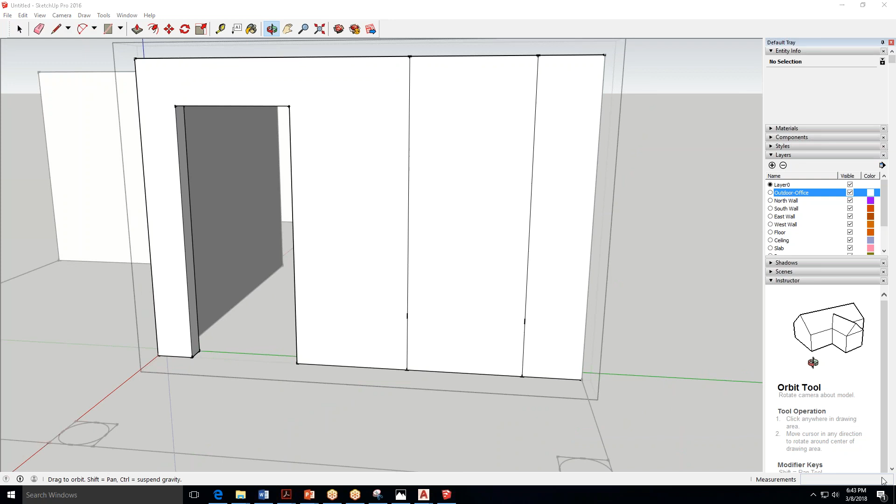All right, so wonderful. What about our window? Well, we have these little dots down here. I grabbed my pen tool and it wanted to find the endpoint right away. I kind of just hover over those lines, and where I had created those guidelines up, it knows they're different down there. So I've got the bottom, which means I can delete with my selection tool by clicking them, one click, delete. Oh, I don't want that. One click, delete. And then I have to figure out the height of this. So to do that, I actually have to open up a second SketchUp file because this was one little measurement I left off.

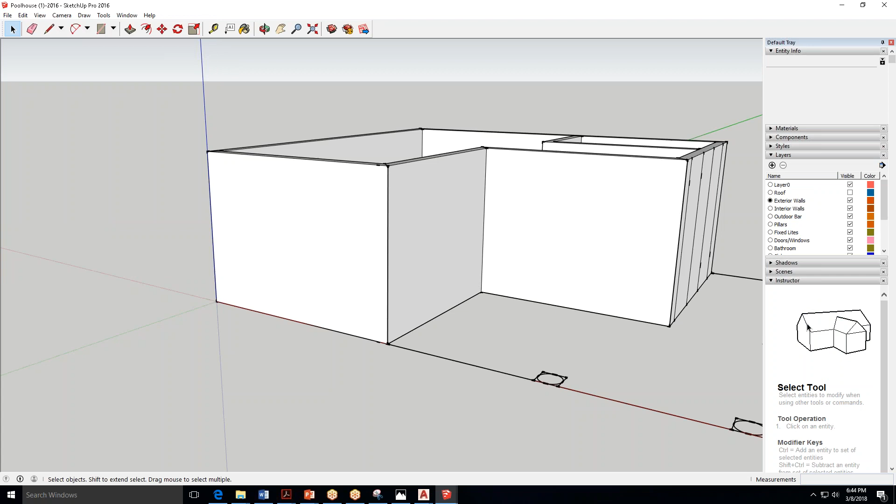Hold on. I'm going to open up pool house one. No. Okay. So I'm going to check on this model, what I've got. So if I come in here and I measure it, it's about 5'3", and we'll just call it that for now for what we're doing for our homework this week. So let me add that in there. Edit. Equals 5'3" tall.

Okay. So I want to grab my measure tool first. So left click on my measure tool, find the endpoint in here, and pull up and type 5'3". Enter. Notice it created a little dot guide point. And I could click from here to here, and it creates a guideline. This is different than CAD, where I'm using lines and drawing extraneous lines. This is just a little dotted line, which I could delete out later. It's not a real physical thing that's going to create a face.

Once I've created my guideline, I can click on my line tool, left click, find the point, and finish off the actual face. Okay, and I know it did it if this is a face like this, that's a dotted gray pattern. So it worked, and I could click on, ooh, Heather, did you see that? All right, so hold up, somewhere in this madness, it looked like it got out of the group. I just want to make sure.

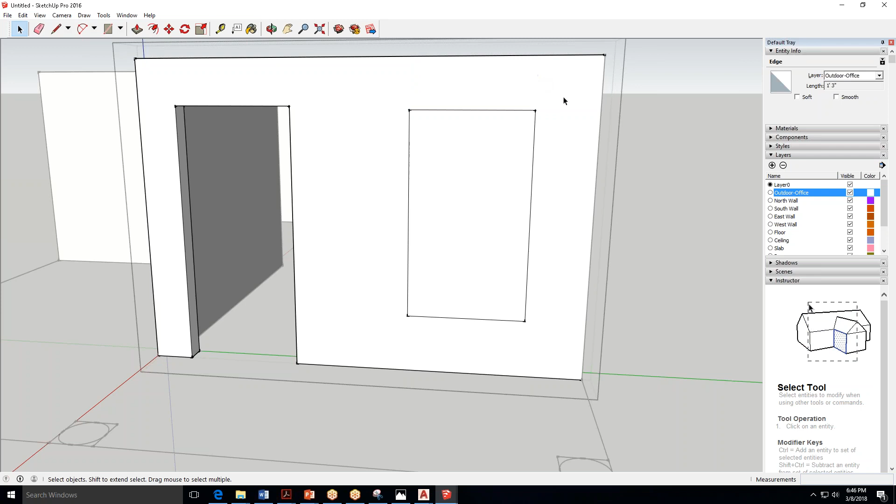All right, so I double clicked and double clicked on this line, this blue dash line. That's what I want to delete. I just wanted to show you if you delete it, your line will stay here. I want to make sure this is inside the group though. We'll find out. This might be your frustrating moment. All right, so then I can delete off the extra by select tool, click, delete, select tool, one click, delete. And then I should be able to do the same thing where I kind of orbit up.

The importance is that you're clicking the face and then clicking the edge on the push-pull so that it knows to cut at the back edge. So I click my push-pull, click on the face, and then I want the snap to say on edge, and it worked out. Woohoo! So now I have an opening for my window created here. Okay. Now I'm going to left click out of the group and review what's left in my homework.

Push-pull the columns and create the slab. And let me look at my time. Yes. All right. So let's see. I said our columns are 8 foot as well. Notice there's a little boxy base, and let's look at my beautiful SketchUp model. All right, so it looks like there's more detail than not. For now, I'm going to create just this tube this week, and then we'll kind of pipe in some more details later, but I'm concerned about the tubes of the column. Last year, I just gave them the columns, they placed them. This year, we're creating at least the idea of them. So

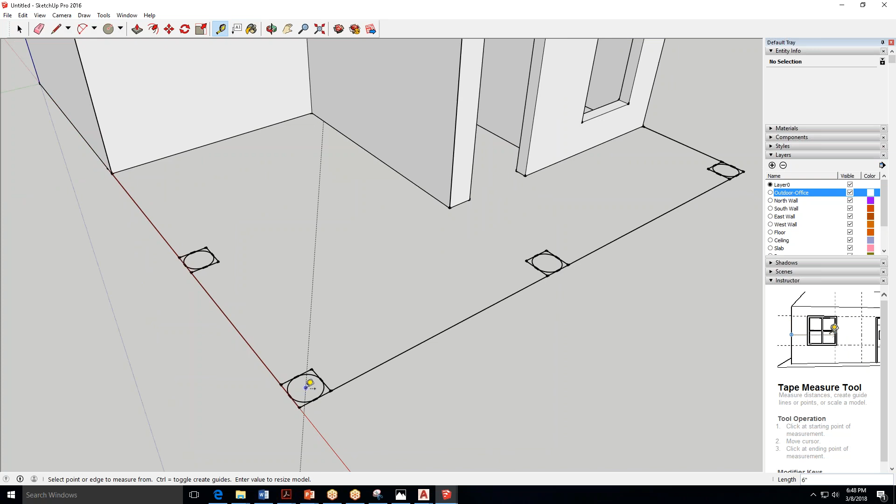I need my circle tool, which is underneath my rectangle with the drop-down menu. Circle, that's what I want active. Now, notice right now, I'm kind of out of luck because there's nothing to snap to. So a little premature. Maybe I want to create some type of guide for myself. So I'm going to click on my measuring tool and come into one of these. The measuring tool is really good at finding points to snap to. So like if I grab an endpoint on the outside and I go to the center, that creates a little dot that I could then snap my circle to.

So then if I click on my circle, it now finds a center point, and I can pull that to the edge, and it will end up creating my circle for me. Now it also created faces in this exterior. It's just a thing. SketchUp does that. Like I said, like autocomplete. It just says, oh, let me do this while I'm at it. We don't care. We just care that it did create the circle.

Okay. So at this point... Hey, Allison? Yes. I just want to check with you real quick. With the tape measure, when you went to the middle, did you just like click it once and that was it? Yeah, let's do it on this one over here. So I could click any endpoint along the diameter of the circle, right? Because it just needs an endpoint. And that allows me to then find it clicking to the center point, which is blue. So see, an endpoint is green and a center point is blue. And then I clicked again, which created that center dot. So a total of 2 clicks? Yep. Two clicks. One from the outside and one from the center? Correct. Okay, thanks.

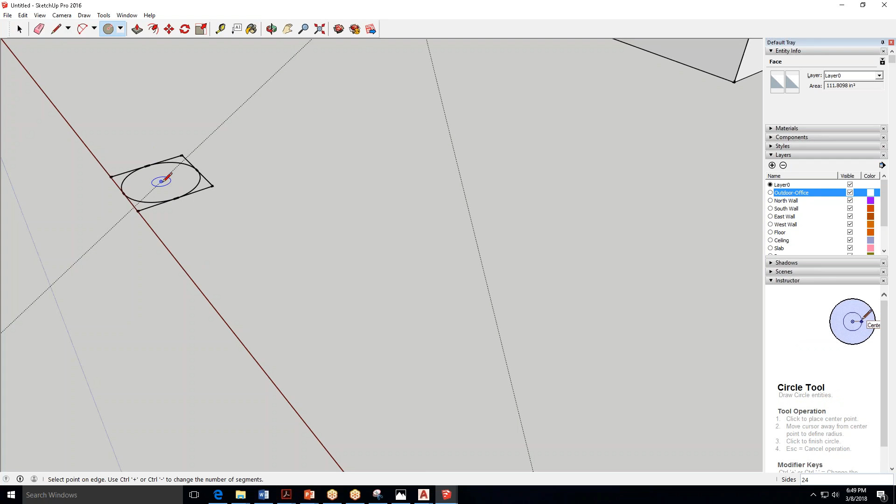So then once I have the center point, I clicked my circle, found the center, so it says center as my first click, and pulled to the end point, which secretly created for me my circle that I will push pull up. So we need to, let me think. Yeah, make a group, but I'm thinking about triple click and double click. So if I just want to double click.

So if I double click on my circle, single click is just going to click the face; two is going to click the face and the whole circle around it, its line that is encompassing it. So when I have that, I could right click it and make it a group, like Myra suggested in the background. Same thing, single click, double click to get it all, right click, make group. Once I have these grouped, I can double click on them and there's my face. I can use my push pull and pull it up.

Ah, that was a circle. What in the heck is going on in my computer?

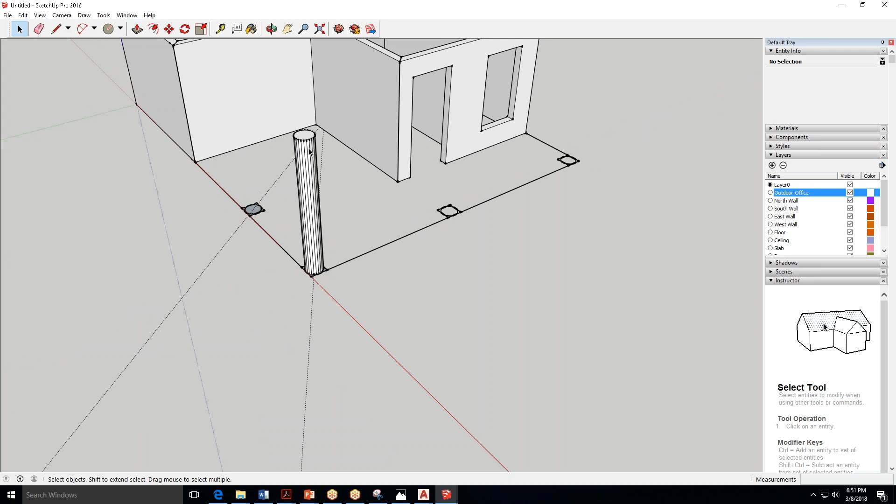Well, I'm going to type 8 foot and just finish this off so we can look at it. There are no curves in SketchUp. Everything is a series of very pinpointed polygonal shapes, all right? So if I look at this, it looks like a circle from above, but it's just very slight angles in a series creating a circle. There is no true curve. It is a bunch of geometric lines that are straight that come together to create every curve.

So that's the difference between this and CAD. CAD could print and it wouldn't be pixelated, it wouldn't have lines in between it, it would have true curves. There's no true curve in the SketchUp program. All right, so this is fine though. It'll read as a column; the reflections, the highlights, the shadows, everything in the software is going to make it look like a rounded column, but you can clearly see there's something going on here.

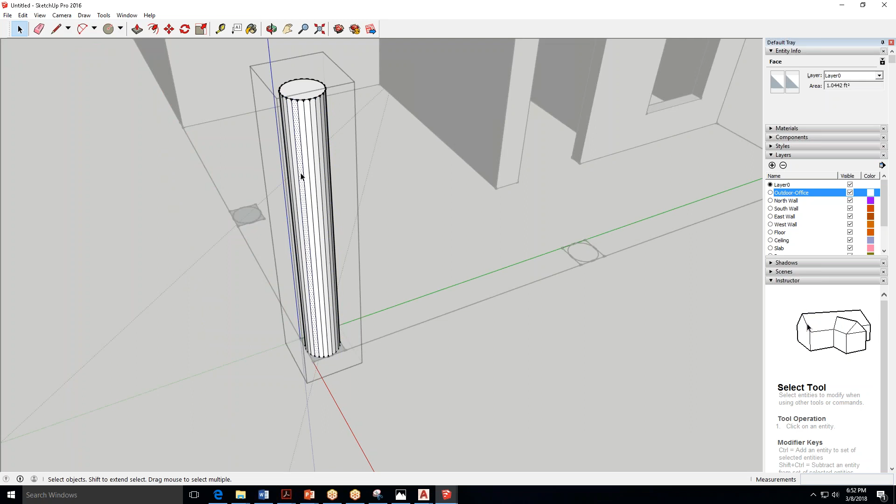And it also makes it annoying when you go to paint it sometimes. I mean, there's secrets around it, but those are strips. So imagine painting every single strip. We don't have to. There's a tool that helps us with it, but it's not one smooth surface. And sometimes it's more noticeable than others, like with a cushion for a chair, for instance, might not look how you want it to. So I'm going to repeat this process.

I'm going to click on my circle face in here. I double clicked, and then I'm going to click on my push pull and come up 8 foot, enter, and that looks good. And I need to do the same process for each of my columns. So redundancy, we are going to come in with our measure tool, find an end point, connect to the blue midpoint, or center I should say, grab my circle tool, click to the center, click to the end point.

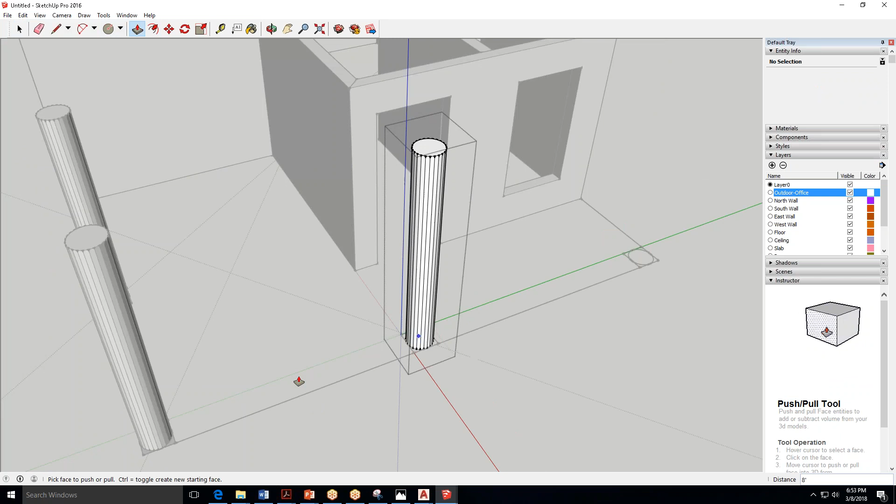That one didn't do my little outside guy. It was special. All right, double click, make it a group, double click to get in the group, activate the face, push pull, 8 foot, enter. Dunk. All right, one more guy, just cruising on through.

Okay, so measure, endpoint to mid, center point, circle to center point, and then to end point. Double click, right click, make a group. Double click to get in the group. Single click to activate my face. Click on my push pull, 8 foot, enter. Yay! Okay, so there are my columns.

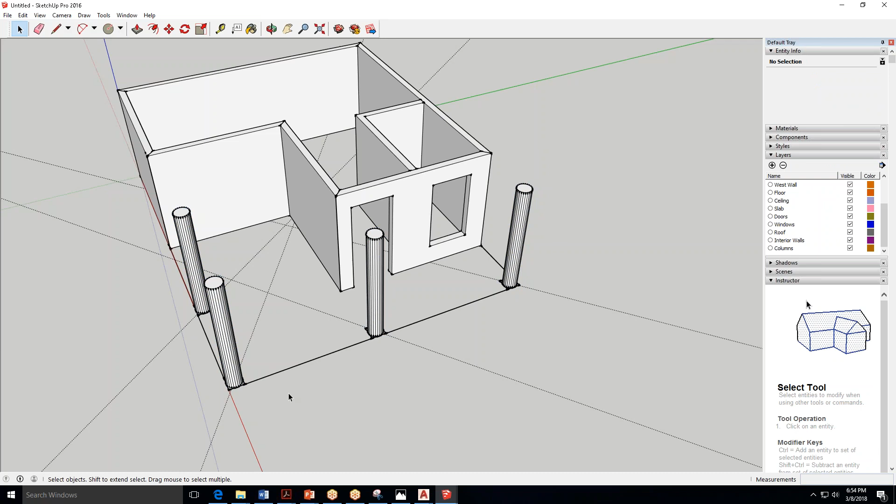And I could create a columns layer. And then I could grab this one and put it on individually, or I could do this, Control plus. I'm holding Control down and clicking on each of the columns, and then go up to layer, and it put them all on columns at once. Then click off. So the last portion of this is creating a slab base that's going to go under this whole model, and it does say that in the homework.

Notice there's a whole bunch of guidelines in here created from the centers of the circles. We can simply delete them. Okay, so you can click on them just with your selection tool, and delete them once we've found all the centers of our circles. It's just created by our measure tool, and they don't matter because they're not real lines, they're just guidelines. So now what I'm going to do is reference my PDF.

It's overall 26 foot by 21 foot. And it's 21 foot this way. So what I'm going to do is, you can always grab your rectangle tool instead of drawing lines. So actually, let me start with lines. So if I'm in here and I'm going to draw a line, and I kind of started from this red one just to give myself some orientation, I'm getting the depth. So it was 21 foot coming back this way. So 21 foot. I'm typing in the lower right hand corner. You can see that typing, enter.

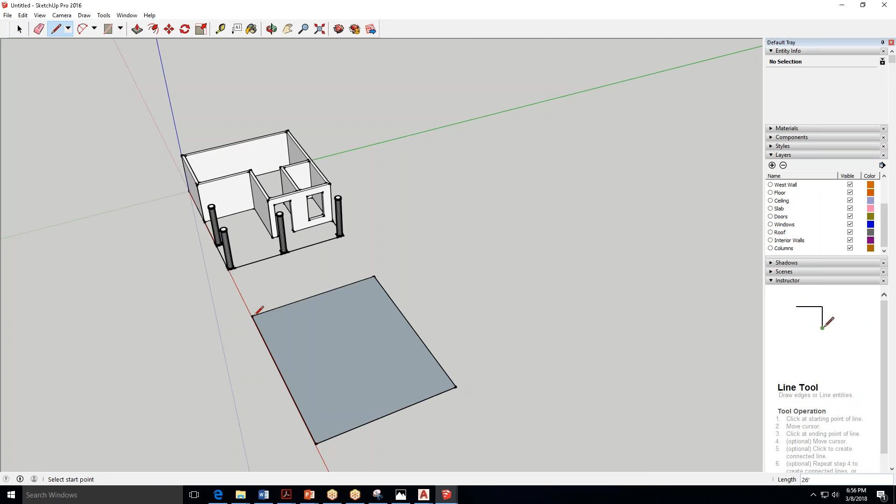And then I think I said 26 foot. And the red is showing me it's coming out perfectly horizontally, or the width. So 26 foot, enter. And then I'm coming, I didn't mean to do that little weirdo line, so I'm going to delete him. It's like it glitched on my cursor. So I can find that endpoint and then pull down until it snaps to green, coming back forward, type 21 foot, enter. And then I can connect my endpoints and see how it follows the red axis in the front there.

Okay, so I could do it with lines. If I do it with lines, I have a face and 4 lines, which means I want to 1, 2, aha, this is the situation. Okay, 1, 2, 3. Okay, so 2 is okay. So double click until it has the lines and the face, and right click to make it a group. I could have saved myself that trouble by first grabbing my rectangle tool and clicking to start up here at this red line. Notice the smaller thickness versus the larger width, and look down at the dimensions in the corner.

So right now, as I'm pulling back, we can see that the 36 foot would be the second dimension, and the 5 foot would be the first. So what I want is going to be the 26 foot and then the 21 foot, if that makes sense. It's kind of like a logical thing. So if I grab my shape again just by itself, I click a starting point. I want to see what's longer and what's wider, so I know what I click comma for. So right now I can see the width that I want is going to come first. So that's 26 foot. So I'll type 26 foot, comma, 21 foot. Enter. And it does the same thing here, but in one step.

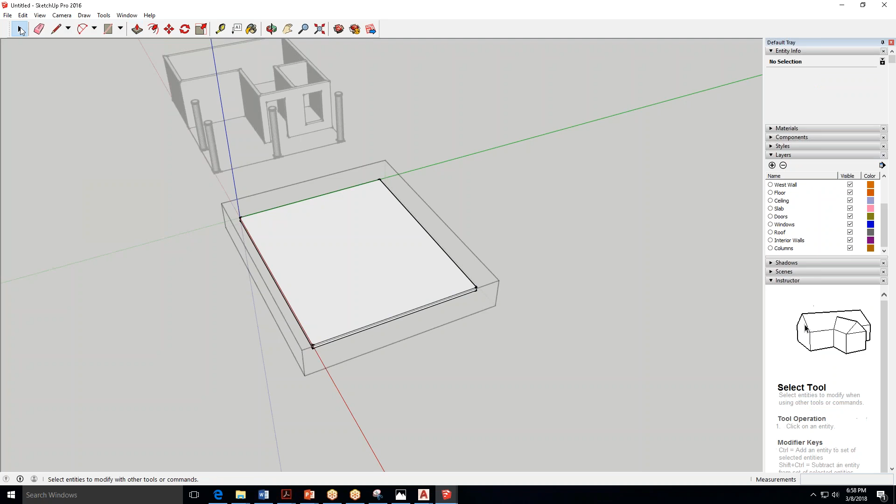I'm going to double click in here, and I'm going to use my push-pull. Click on the face and pull down, let's say, it doesn't really matter. Let's just do 6 inches. It doesn't have to be anything special. And then click with my arrow out of here. And now I need to move him into place. Okay. So I could click on him, and then I can click move. And I want to zoom in for this.

I need to find the endpoint that's going to connect with the floor plan level, because this goes down underneath. So the flat top face is what's in line with that floor plan drawing. So I'm going to click on this corner here. And notice if I stay snapped, like this is way off. This is coming up in the sky.

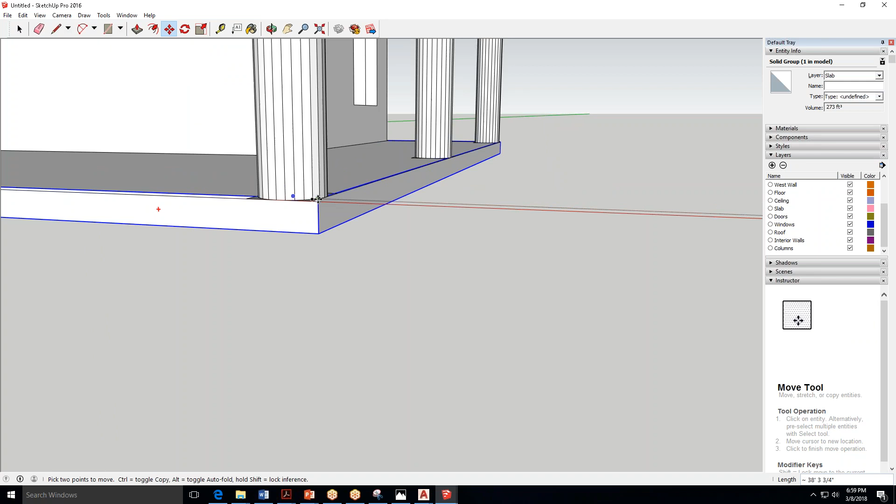If I start pulling up, if I pull just to the left and follow this slight angle of this red plane, because my vertices are all pointing their true directions I want to go, and I stay on that red line, I should be able to zoom in here and find the end point of my top layer to snap in. So it was that little square for the floor plan.

So now when I orbit up, and I just clicked to place it, I've got this lovely slab placed there, which means underneath is the slab, and the face is now making up the floor of the building and meeting with the bottom edges of the walls.

Okay, so that is your homework for the week. Let me pull up my notes though and cover anything I didn't, although I thought there were lots of opportunities to cover most of the terminology and use of basic tools.

Yep, rounded out my homework. It's all right there under assignment 8. We have some things to just draw: circle, rectangle, freehand shape, 2-point arc.

Let's look at rectangle really quickly. I do make it look really smooth when you're in here, but it's just going to be a trial and error process. Some things we'll learn more about moving efficiently when we get furniture and objects in here.

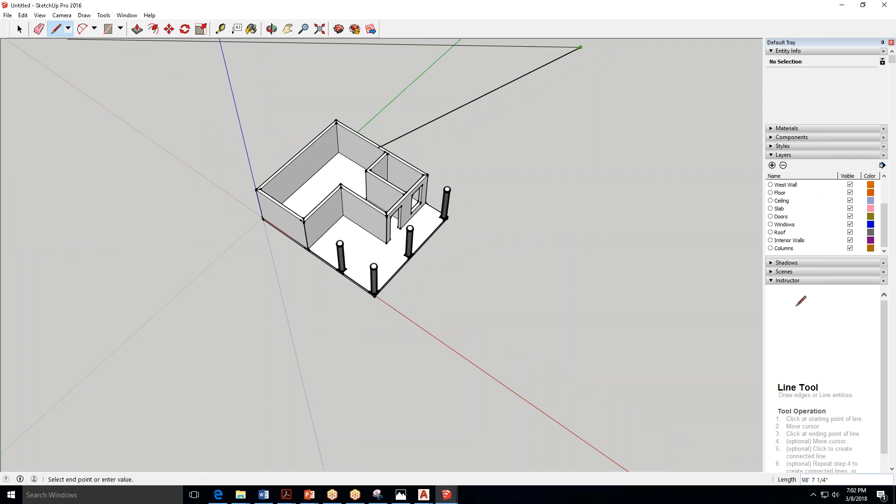If I had been up here, then orbit around, I'll see, oh, that connected to the top of the building. There are instances where it could just suddenly be in space and you think you're going up, but you're really angling down. So let's see what I've made for myself. You thought I was still going out, left and right, but that line is down. When I'm up here, it kind of looked like it was coming out and over.

So we want to orient ourselves to top view when we're drawing out lines and new shapes like rectangles and circles, just floating into space. After we're done with that, we can physically move them up and down, which I'll show you now. So if I go to camera, standard view, top view...

Rectangle - part of your homework is just drawing stuff, it doesn't matter where it's at. I click and I click, I don't care about the size, and I left click off. I might want to make it a group just to show you how I could move it then and know I'm moving it successfully.

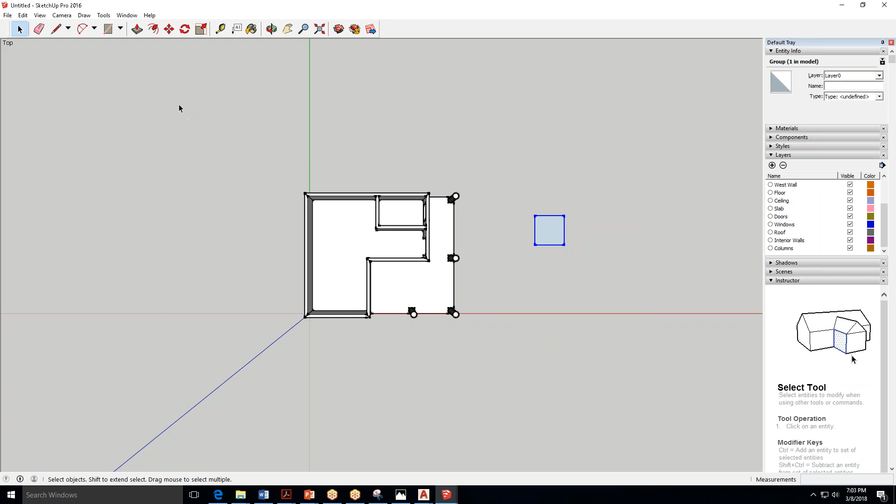Right now I know, because I'm in top view, it drew it on the flat plane that matches up with ground level for here. So I'm going to click, click, right click, make it a group. Then I'm going to orbit. And once I know I have this kind of 0 point...

You're not going to believe me that that is... see, that's where you'll start moving it because you're like, that's floating above. But no, it isn't. It's really lined up with this. It's just kind of hard to believe. So once I have that, I'm going to prove this to you.

I could move it down 6 inches and it'll be in line with this. So if I then do move and pick a corner, and I start pulling down on the blue axis, see that dashed line, and I type 6 inches, enter, as I pull down. Then if I'm right and I pull this straight to the right, it should line up with this bottom line here.

So move, and now the corner, and I pull it over, and the line stays red, which is what's important. Let me get in closer so you can believe me. See this red? I'm pointing at it here in the real space. I keep going, it's hard to get it to do at an angle.

I think I'm going to use my keyboard, so I'll hit the left arrow so it snaps, and we'll talk about that too. Ta-da! It bounces right there on the edge, okay? So it didn't look like it was aligned, but it was. I have to trust that I placed it from the top view correctly and moved it the right dimension based off of what I typed into the measurements in the bottom right.

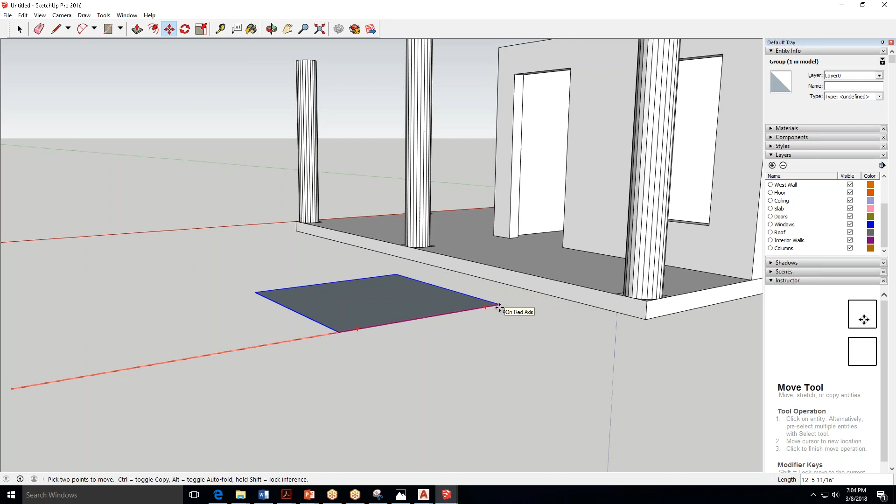What I did there, I was having some trouble, so I clicked to move it. If you hit the little arrows in the lower right-hand corner of your keyboard, it'll snap it to things so it doesn't get off.

So right now it's like, maybe I want to go here, but where I want it is here. I'm going to click the left arrow, the way I'm kind of moving on my keyboard, and then it's made it so it doesn't want to unlock from there until I place it. If I clicked up, it will snap up, and down does the same thing. If I click left, it snaps to the green axis - they all allow you to snap it so it's not willy-nilly everywhere.

Okay, so that's a rectangle. Now you don't have to move them, I just want you to understand moving them since we have some time right now, which is my plan by not drawing stuff in AutoCAD. So if we go to camera, standard view, top, and place you somewhere - driving me crazy.

Circle. We did that already for those, but I wanted to see your own circle. There's a circle. Great. Homework done for that portion.

2-point arc. Underneath our arc is an arc, a 2-point arc, and a 3-point arc. So we want our 2-point, which means I click once, I click again, and then as I pull my cursor, it's about those 2 points. Those 2 points control the left and right boundaries for that curve, and the center point of it is where it's arcing the most. You just need to draw one and plop it down.

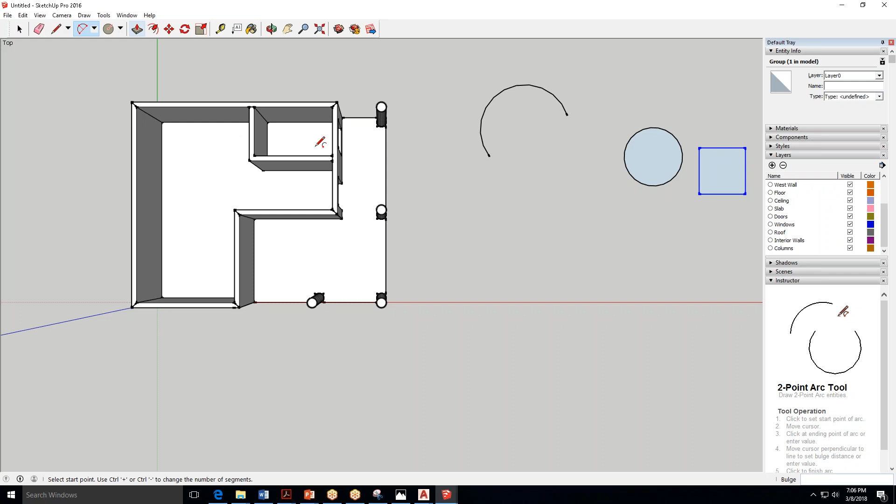Freehand shape - well, that one's really easy, just to see what happens. Here's my freehand shape - let me choose my line tool first. I just want to do something not a rectangle or a square that's finished and makes a face. You can get pretty creative in here. Okay, there it is. Let's see, is it flat?

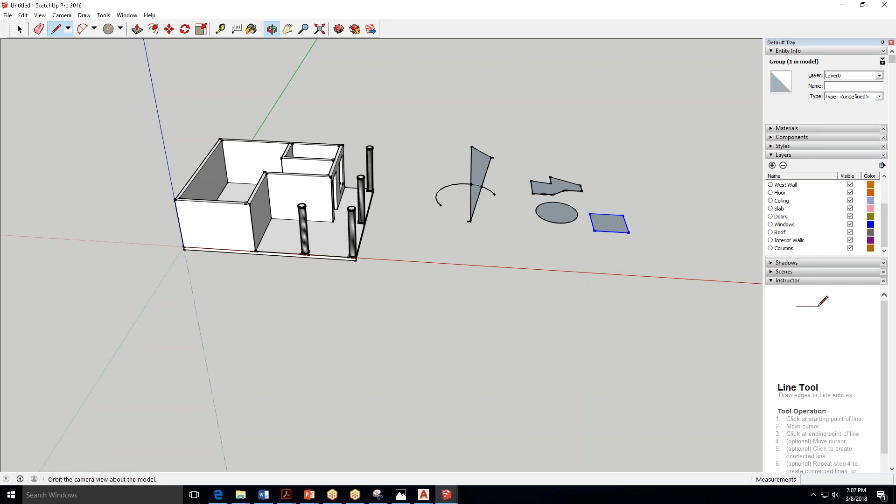If I orbit it up a little bit, I could even connect weird floating shapes, like if I had it kind of like this, and then I had a point here, up here - and up might actually feel more like down - and then I come back here. Let's see what that did. Is it all flat in there, even though I went up a little bit? Looks like it's hovering over these guys, but it's still fairly flat.

Sometimes you can get it to go up in the air. So like if I had created a point off of here and somehow got it to my blue axis and then came down and in, I could also do freehand shapes that are free floating in space. Okay, and that's just clicking and kind of orbiting and using the up, down, left, right arrows or the axes that I see by pulling up and down and left and right while I go to place something to get them in these three-dimensional lines.

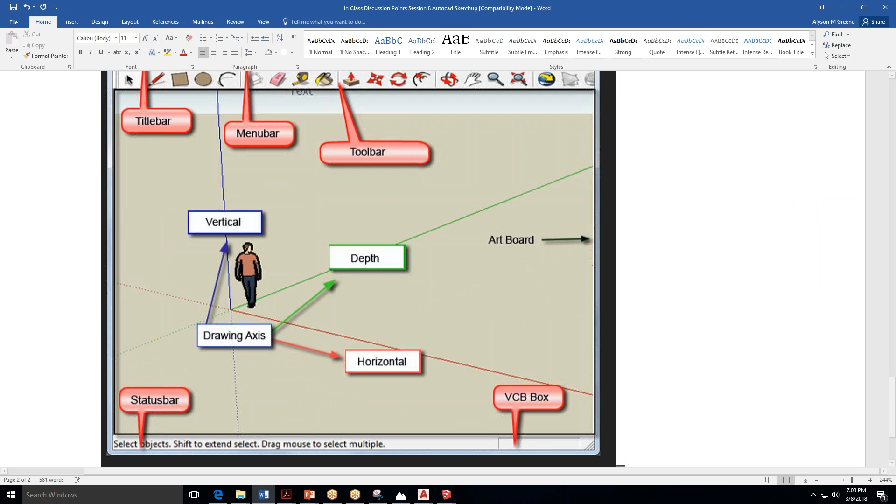In SketchUp, you're always working in 3D. It does the shading and perspective for you. You use it for 3D modeling. It was the first free 3D modeling program offered to the general public before it was costly - people were pirating other modeling software. There is a free version of SketchUp and a paid version, SketchUp Pro.

It works with both Mac and PC. Pro is used by architects, production designers, and other design professionals. Only with Pro do we get Layout and Presentation, which are the two things found on your desktop that we don't cover very much - they come in with it, like Style Builder, Layout, and Presentation. Just keep them - we might never use them, but they're still useful to have as you have your year-long license, and if you ever do independent study with me, we'll talk more about them.

SketchUp comes with tutorials that aid in learning, and it's one of the easiest 3D software to use. Similar to CAD, 3D software deals with two basic types of modeling: solid and surface. SketchUp deals with surfaces, so unlike CAD 3D solid shapes which you could 3D print and wouldn't be hollow, SketchUp's shapes would be hollow, with a gap in between. It's not solid, not something you could cut through with a knife.

Lines are more commonly referred to as edges. A solid would be like working with clay and cutting it into pieces. SketchUp Pro does have some limited use of solid features, but we're not going to dive into it.

There's another breakdown of curved modelers and polygonal modelers. SketchUp is a polygonal modeler, uses all straight lines and flat surfaces, and fakes curviness. It does not naturally photorealistically render, but there are plugins you can buy, which I'll show you in a minute. Dynamic components are new - so if you download a cabinet, sometimes you can right click and it'll automatically change to be 24 inches, 36, or 30, just from one individual model.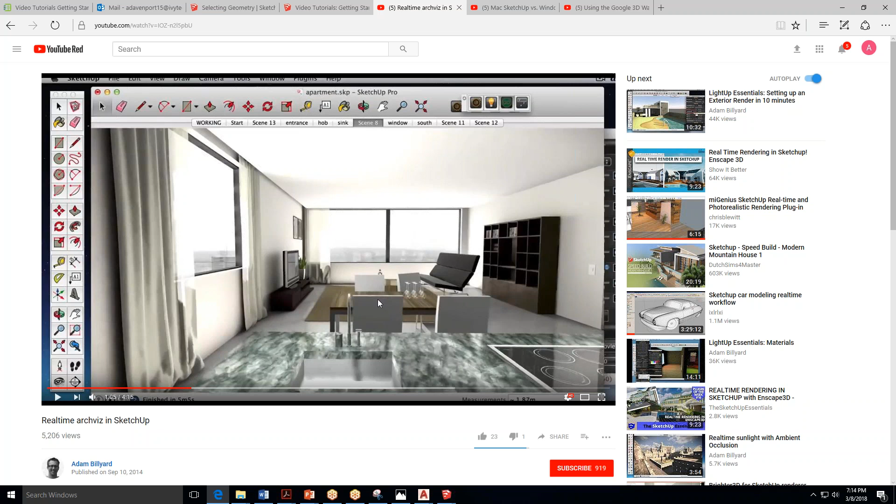Here is a plugin. A plugin is a separate software - you download it and then click to add it into your SketchUp. And once you add it into your SketchUp, and most of them you have to pay for, some are free, it has the ability to render like this instead of what you're seeing with my SketchUp. It's almost as good as Revit, and in some cases it's better than Revit.

So it is possible. There are some lower level free ones like Kerkythea, which I've used in the professional field, but it's pretty much as intense as trying to understand Revit on your own, if not more, because there's no individual tools for three-dimensional shapes - you have to draw them and then make them light up and all this other stuff. So the plugins are easy; the free plugins, not so easy.

They range - you could pay $5, you could pay $50, and usually you can watch videos to see how easy they are to use and read reviews on places like YouTube and other sites. I don't have any I recommend.

I really just hope that we get through basic CAD in my class. Mac versus Windows SketchUp, I just include this for people who are like, what is the difference? There's some people who really, really want to use Mac, and for my class, it's just not worth your time if you're somebody who needs step-by-step instruction, because I can't do both. But this explains the big differences in the tools overall. It's kind of old, and it might have changed for our new version, but it still talks about the usability of it.

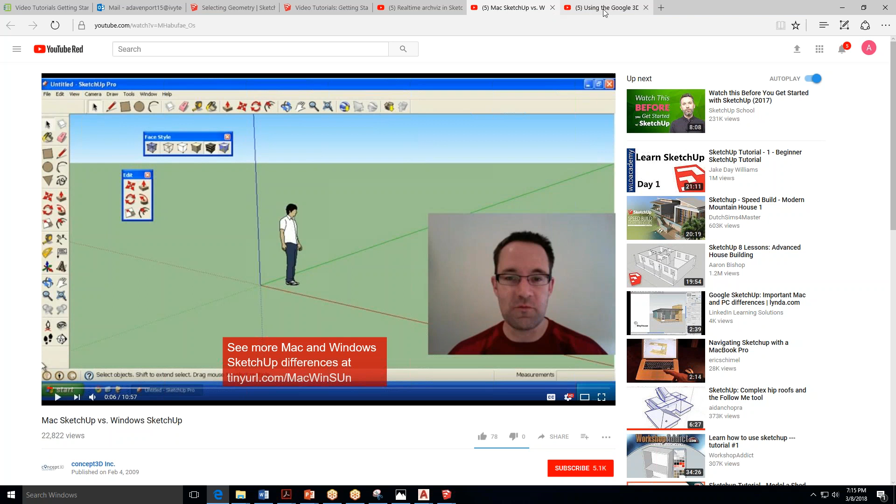3D warehouse. Okay, so this is where I'm just going to kind of breeze through this and open a file to talk about where you're headed in space planning, and for people who are going to leave my class and just know how to use SketchUp that want to use it for their own house like I use it for mine. So I'm going to open up from my desktop my week 8, and I did the same thing that I did with that file, except I went into Liz's AutoCAD file, the big one, and I saw, okay, space planners. So Liz had a kitchen.

She had a couple kitchens that she had set up in here, and I just isolated this one, copied it, made a new file, pasted my kitchen in where I wanted it to be, saved it as kitchen isolated, and I imported that little footprint in. And then doing what I did tonight, I was able to just walk through really fast.

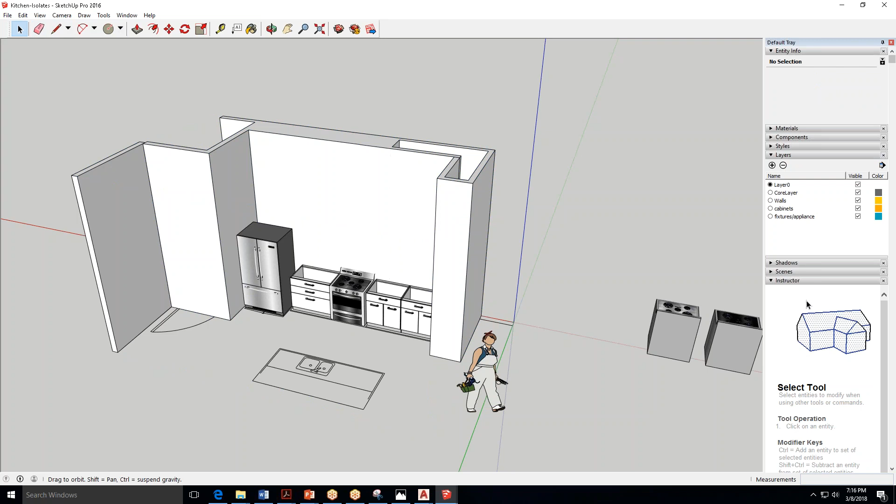Now, when you're doing elevations, in some situations, we don't care about the walls. We just care that the walls are on their own layers. So I just went through and did the close the shape, all the walls drew at once, pulled it all up at once. Notice there's no corners in here, because all I really care about is exporting this elevation. This is where you're going to be my new best friend, right?

So what is the Google Warehouse? It's this little 3D warehouse button in the upper right-hand corner. And it has thousands, if not millions, I'd believe at this point, of things that other people have taken the time to model. So let's do cabinets. And here's all these cabinets. And it's going to go on for a lifetime's worth of cabinets. Shaker cabinets and French country cabinets and plain flat overlay cabinets and anything you can think of.

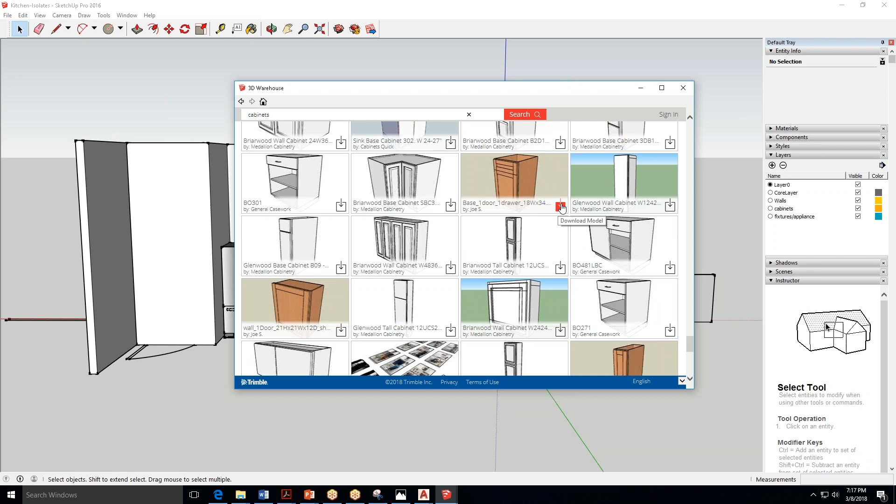Also, you could go to KraftMaid's website and download the models directly from them, already set up in really nice floor plans as complete footprints, and bring them in. So you can see why it would be great. I can bring in this whole kitchen if I want to. Now, it's open source to everyone. That means little 5-year-old Tiffany and me, and you sometimes get the quality of little 5-year-old Tiffany, okay?

So don't trust everything. Just like the blocks where today Professor King goes, that depth of that closet is too deep, you need to modify it. Blocks and things are for your reference only and meant to speed up the process, but not to be depended on for you figuring out codes and specifications, all right? You need to do the work. These are just placeholder time savers.

Some you know, because when you click on them, it's going to tell you the exact dimensions. And some of these are pretty great. So they're going to say 24 inches by 30 inches, and you'll be like, great, I can use that. Other things, little Tiffany put up there and she's messed around with and it's broken and you're not going to know. Measure everything. That is your responsibility as a designer.

All right, so I'm going to download this. And it brings it into my model. I'll put it by Rosie over here. And then I can rotate it. Now, this is not the main study for me today. We're going to do this in the future. I just want to get you excited. So I could rotate it any way. I could rotate it up and down that way.

If I go to camera, standard views, top, rotations, just like movements, are easier when you're looking at them from the top down with things you're placing. So I can spin it all the way around, and we can type in degrees, and we can type in all types of stuff. Works a lot like CAD. Rotations, just 3-dimensional, lots of snapping.

And there's my cabinets, probably the right height, right size toe kick, and whatever width I've brought in is the width that I have. We can also then easily scale this to be bigger or smaller. Now it obscures some of the stuff in the middle, so it might be even easier to just say, no, I don't want to do that.

I want one that's double that, and I Control C, and then I edit, paste in place. Now I'm flying through this because it's not your homework. It's just a tutorial on why this is so great. And I copied and I pasted it in place, and then I have another series of cabinets, and again and again and again, as many times as I want. And then I could bring in the other ones.

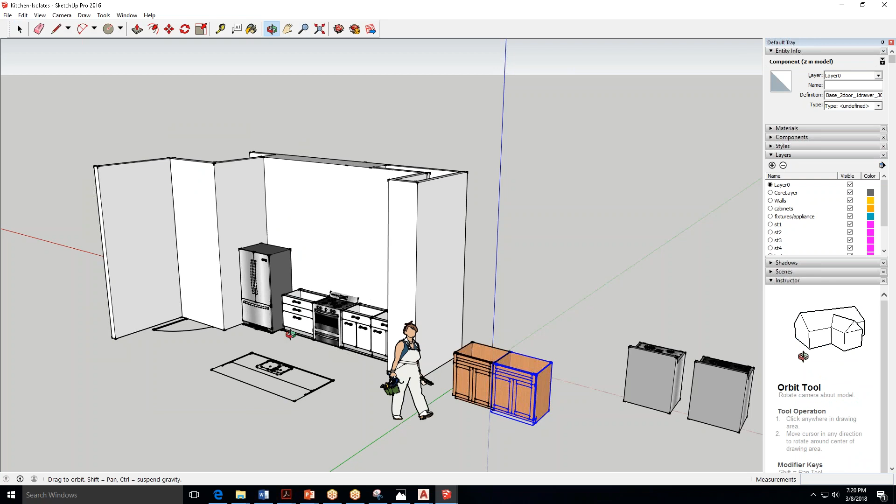Now I said some of these, you can right click on them and they're dynamic. And if it is dynamic, this one is not, and you can search by dynamic on SketchUp, I could just come in here and it would say change to 36, and I click 36 and it would shrink or expand accordingly. Once you get your models in, like I've placed some, this is what's great.

So I can pull this over, and I created exactly what Liz wanted: a refrigerator, a stove, these cabinets minus a countertop. It also helps you think about the reality of your model. So in the center part, if you put your kitchen there, it's like 12-foot walls or 10-foot or something. So it's really high, and I don't have any upper cabinets, but look at all the negative space above. Not pretty, I'm just telling you that. So do you want beams or do you want taller upper cabinets? You really have to think about it three-dimensionally.

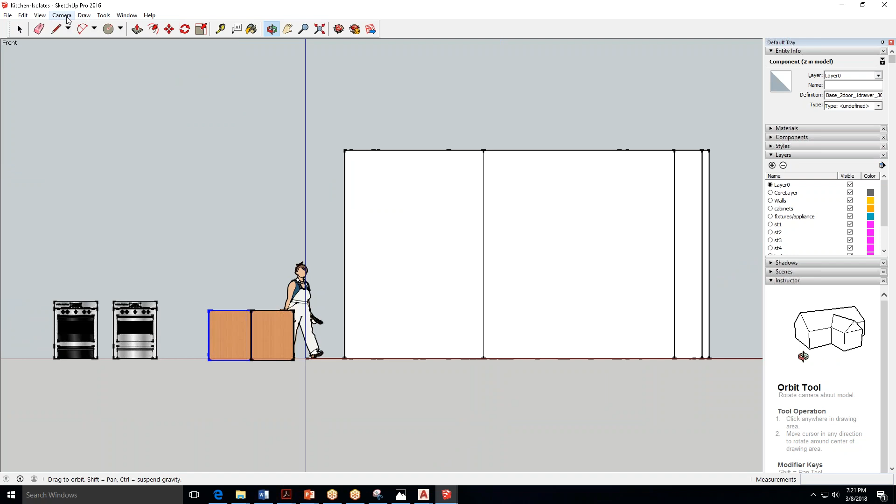So once I get in here, I can go into parallel projection. Just ignore anything you don't understand right now. Standard views, I'm gonna say probably front. Okay, so that made it into an elevation, the combination of those two things. And I'm gonna delete out all this junk, Rosie, my other ranges I didn't use, any little pieces. Zoom out until I've just got my elevation.

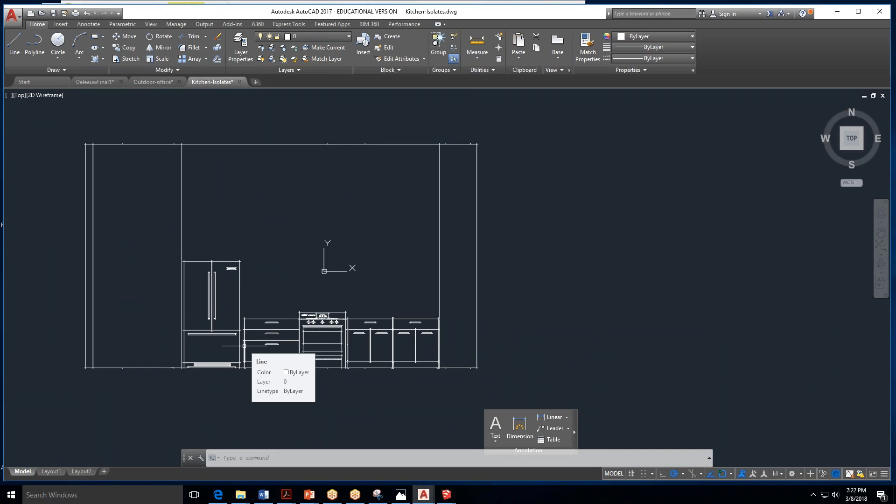And then I'm gonna go to File, Export, 2D Graphic, Week 8. I'm gonna change this to AutoCAD drawing file, Export. Okay. And then I'm going to go into my week 8. Open this. Oh, there's my elevation as I have it from there, in lines with all the little teeny tiny stuff on them. Now it needs to be cleaned up some, but it could be an extreme time saver, right? Especially if the elevations aren't dimensioned elevations. Now these would be, so they'd have to be brought back into CAD.

But let me show you. Copy, go back in here and paste. This matches up with this. It's backwards and upside down. But see how I then have an elevation for that space in about 10 seconds. So if you bring in the right models, it could look really, really pretty, and it takes you no time, and you dimension it all out. So we all can see the obvious benefits of SketchUp.

Cindy says, does the undo work like AutoCAD? Yeah, undo is universal, which is wonderful. So if we're in here and I delete Jim on accident, sorry Jim, and we go to edit, undo, there he is, pop right back to where we want him.

So you're like, okay, cabinetry is great, but you can do any number of things. So this is the other last thing. I've got 7 minutes and we'll see if I can get it done or not. If I want to do my pool house model, let's see if I have one on here. Pool house. This. Let's imagine I do have it. Is this it? If it'll let me open it.

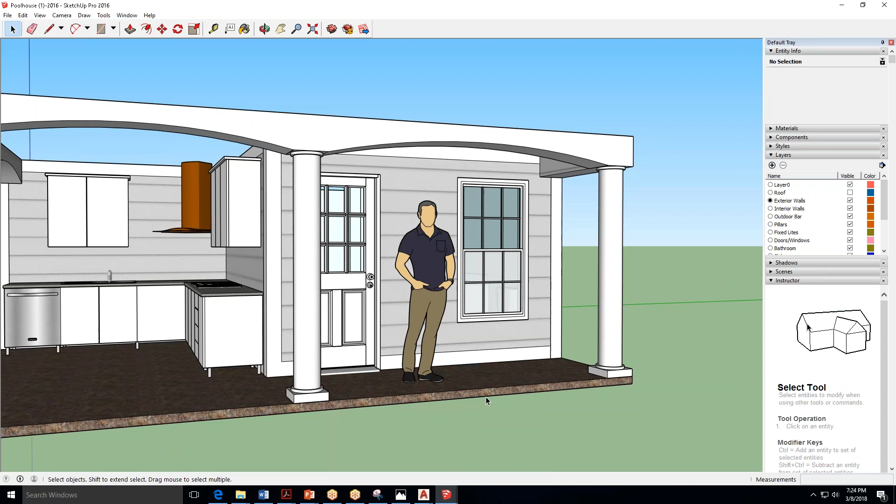So if I was to come into SketchUp and let's say I have this house. This is perfect, okay? And I give you a file like this for the whole pool house, and you're going to be responsible after your break for doing exterior elevations for Professor King. And you saw how time-consuming this section was with me telling you exactly what to do. If I come in here and I do camera, standard views, front, or I could do camera, standard views, left, any of these could be an elevation. All right, we like this one the most, parallel projection.

And then I do file, export, 2D graphic, pool house, desktop, week 8, export. And this was the pool house model that I gave you already fully drawn. Then I go into my AutoCAD and where's my week 8? Let's see. It's thinking right now. Sort by date modified. Still drawing it.

Let me make sure I was right. Oh, it was a JPEG. I don't want a JPEG. I want this. There we go. Because here's what it made: it made a beautiful JPEG, which is nice for other reasons. So we got that. If I don't want a picture,

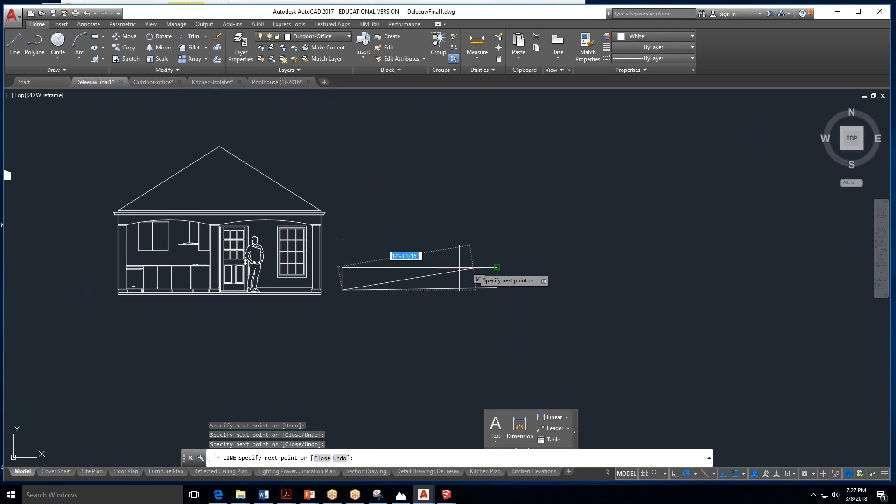And then based off of your plan, some of you could do the patio side of this. So you'll rotate my model to be that way, and then you'll end up having a patio, and the patio will be so high, and maybe you're modifying it to have little planters on it, and maybe there's going to be a dining table, and in that case it's your job to do stuff to the model in SketchUp, right?

I would come in and say, okay, I'm going to add chairs, so when I export this you'll see the little top of the chair over the patio, and I might add dormers or people standing over here and a car and whatever else, but Mrs. Green has done all the work for you. So it'll make your life easier, but that's up to you to do outside of my class. We don't do those exterior elevations for my class. I just show you how to use the software to benefit yourself, okay?

All right, you're welcome. And it's not cheating either. I've asked Professor King because there's enough modifications to be made, but it just gets you thinking because we use the software for this kind of stuff all the time. The annoying thing is it looks pretty from 10 foot away. SketchUp doesn't import and export as well as it is in there.

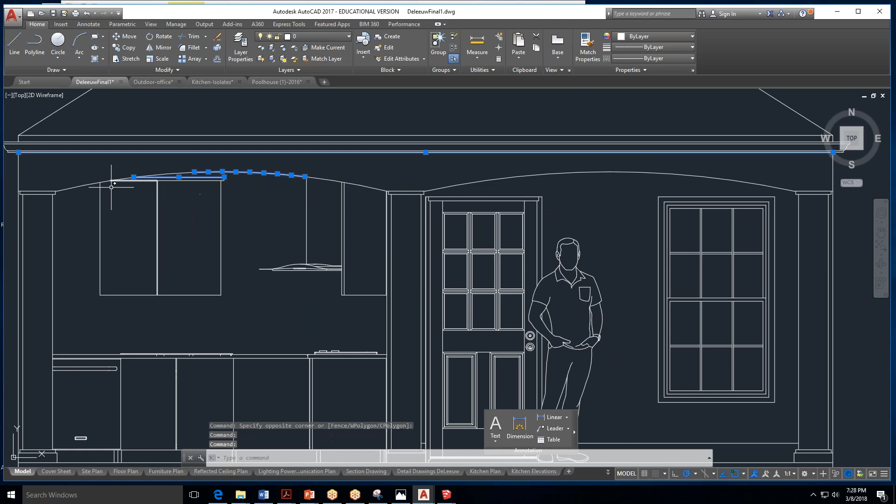So it's polygonal. So instead of having a nice thing, now you have 10,000 lines. This might be made up of 50 lines. You never know what you're going to get, okay? Where we had a solid line here, this guy's made up of so many lines. And lines are hard to think about. So for these kind of things, you want to be choosy.

You don't want to import and export just willy-nilly. You want to do that for final elevations and things that are going to take up space on purpose, not just hang out in case you ever want them. They'll really slow you down. If you're lagging now, you're really lagging.

Okay, so this is due the 22nd after your break. I hope you all enjoy your break. When we come back, we'll continue on with SketchUp and CAD in a mixture like this, which is super helpful. A lot of your work you'll see in 108 is being explained by me. I explain things a little bit differently, kind of logical step-by-step things like we did tonight, although actually it's doubly reinforced.

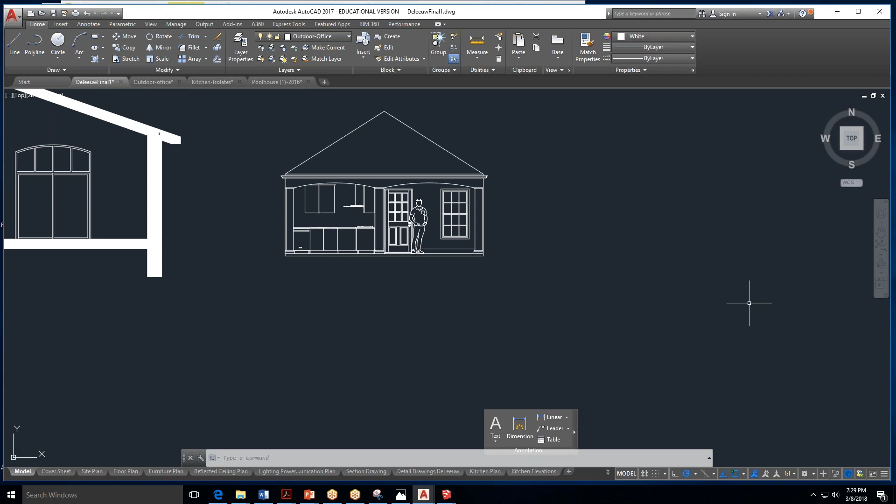So we'll get into the electrical plan and I show you how to draw an electrical plan, so all the drawing that's due for Professor King is re-explained in my class by me. So if you have questions, come to either of us because we work together all the time. I know a lot about her class and I want to help.